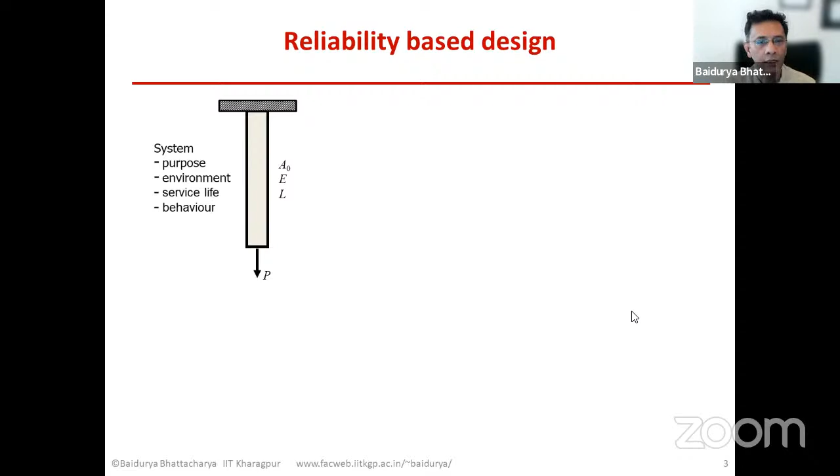So let us say that we have a structural system, a system whose mechanics we understand. And this is the simplest possible configuration that you can imagine. It's a cable suspended from the ceiling. So we know the purpose, the environment, the expected service life, and how it behaves to external inputs. And what we want to do is to assess this system. We know its system properties, the inputs, the response, the input-output model, which is very simple here as you see on the left part of your screen. On a more realistic structure, we would have a finite element model. What's important is there is a system capacity, which we know precisely, and that comes out of our understanding of the application, the purpose of what this is. So here, let us say the capacity is defined in terms of a displacement. So we should be able to define failure in terms of response exceeds capacity, which in this case is what you see on the left part of your screen: PL over AE is greater than delta max, which is the capacity of my system.

Now, there are many issues, time dependence and etc., which we don't need to touch for this particular case. The capacity can be two-sided, not one-sided. But the important point to note here is that there are uncertainties. There are uncertainties in the input to the system, uncertainties in the properties of the system. The model, the input-output model itself can be idealized, so there are uncertainties there. And other issues like missed or unknown modes of failure, etc. So what happens is failure, which is the response exceeding the capacity, or the system behaving in a manner that is not acceptable to us, because of these uncertainties, has a non-zero probability of occurrence. So that is where we come in.

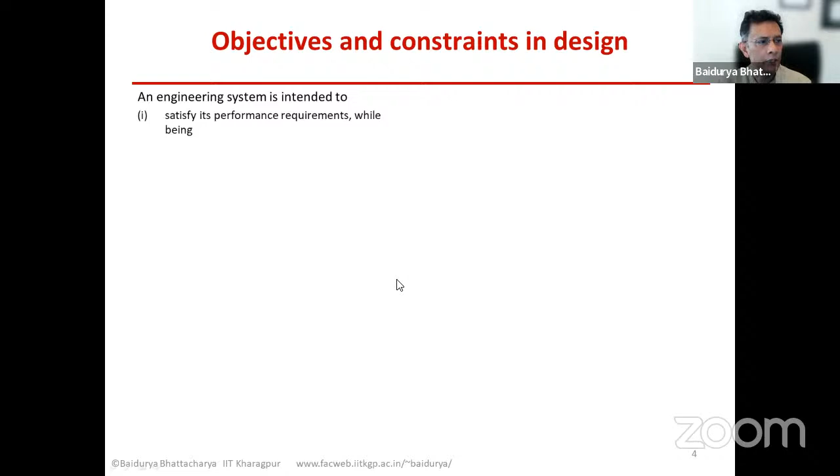An engineered system is expected to satisfy certain performance requirements while being economical and safe. So that's a very general statement. And the emphasis, whether on performance or on safety, depends on who you're talking to. So it depends on the stakeholder.

In general, it's a multi-objective optimization, so it's a very difficult problem to solve. But if we can strip it down to its absolute essential, then one approach could be to minimize the total cost, subject to performances being met - theta being the performances - and safety margins being acceptable. So M is safety margin, theta is performance, and the asterisks are the acceptable values. You can obviously have this two-sided, a lower bound and upper bound, but here we have lower bounds.

Now, this is not the only way that you could do this. You could look at the dual problem, maximize performance subject to the constraints and safety. You can bring in benefit, so benefit minus cost, the net benefit, and maximize the benefit instead. So these are all equivalent approaches to design. You could also maximize safety, but obviously safety is typically a constraint. If safety was an objective, then it would be a different system, but that we would be interested in. In general, that's also an acceptable approach.

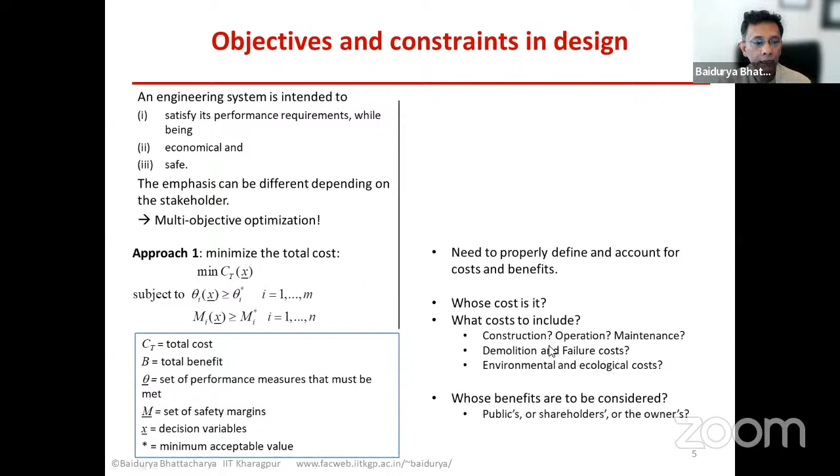Now, the question is, we need to define the costs and benefits properly - what to include, what sort of failure costs need to be taken into account. Is it the public's, is it the owner's, or is it some other stakeholder's? And finally, the question that we started with: what about the uncertainties? The moment you bring in uncertainties, then the presentation of this optimization problem has to change.

And what becomes different? First of all, the objective function, the constraints, even the decision variable. So one very common way is to minimize, instead of the total cost, the total expected cost. And likewise, you would expect that the constraints, even if they're not satisfied, should be satisfied most of the time, which is acceptable to you.

So the performance constraint should be satisfied with at least a probability Pi. The safety constraint should be satisfied at least with probability R, which is the reliability that we have been talking about. So the question is, how do we get this?

And there are issues - you could do it for systems, you could do it for components, you could do it for various types of limit states. So each of these M's, Mi greater than Mi star, comes from some performance requirements. These could be given with the help of mechanics in terms of limit state equations. So you could have life safety limit state, and on the other extreme, functionality limit states, which could be reversible and irreversible. So you could have a set of limit states for a structural system or a component.

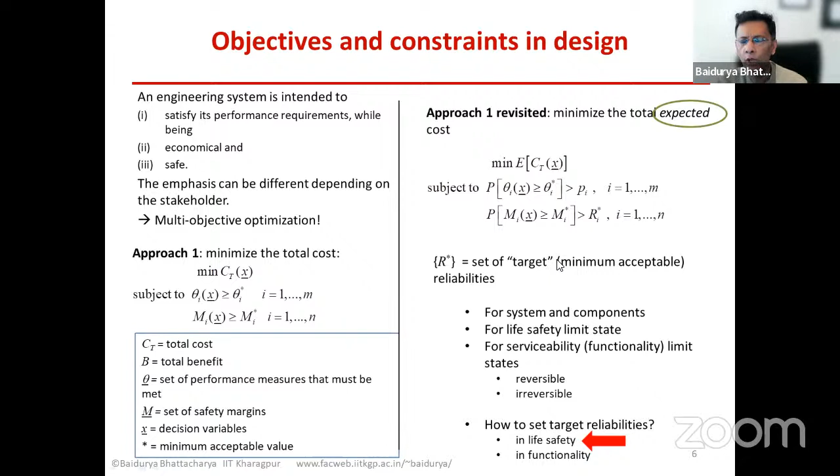So these are the questions: how safe is safe enough? At the moment you're talking about life safety, how much risk to life, property, and environment is acceptable? What failure consequences need to be taken into account, because that basically determines how safe you want it to be.

Equivalently, how much loss is acceptable, how to handle partial failures. And if not safe enough, you have to redesign, or decide how much money to spend. After setting the target reliability, although it's not part of this talk, in general it's very important to

communicate the risk properly with the owners and stakeholders, and more finer details like the differences between the actual risk and the perceived risk. The tolerable risk might change with time, and that's something you observe in different societies. It also may depend on the sense of control, whether it's voluntary or involuntary risk, and all sorts of things. But when we set target reliabilities, especially in life safety, these issues have to be kept in mind.

Now, before we discuss all the different ways and the history, let's make some very important observations. These are some facts: structural failures are rare events. Also, large-scale testing of nominally identical buildings, bridges, ships that we typically deal with, to failure, is not possible, which is different from what is done in other disciplines of reliability.

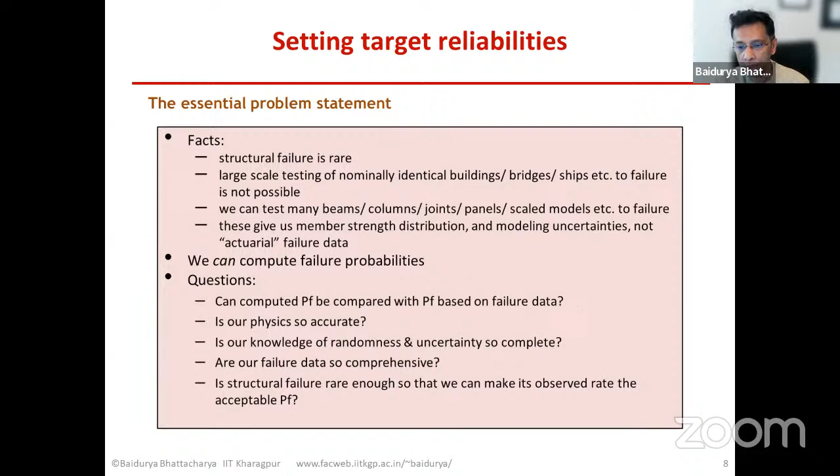So when the very first generation of codes started appearing, they tried to avoid some of these questions through a process we now call calibration. Let's go through some statements from one of the earliest researchers, the pioneer in our field, Professor A.M. Freudenthal. If we look at some of his statements from his 1956 paper, clearly the seeds were sown even that far back.

If you look at some of his statements, we need numerical values for probabilities of failure, of avoiding failure and loss of functionality, the idea of cost came in. So cost minimization, expected cost, that was also there. Now also, if life safety is involved, the author was very cautious about the acceptable failure probability, and he said that should be practically zero.

We understand that's not possible now, so we've accepted very low failure probabilities that are acceptable to all stakeholders. But the idea of life safety and good reliability for that is also very old.

Professor Freudenthal also admitted that it is not possible to do this for buildings from first principles, so until that was possible, comparison with other similar systems is what he recommended. This is actually what ends up being calibration. So we now see calibration-based methods for setting target reliabilities, and consequence-based methods, which consider fatality and economic losses. And very recently, we are seeing some movement towards optimization-based methods, and that's what I want to leave you with, some questions.

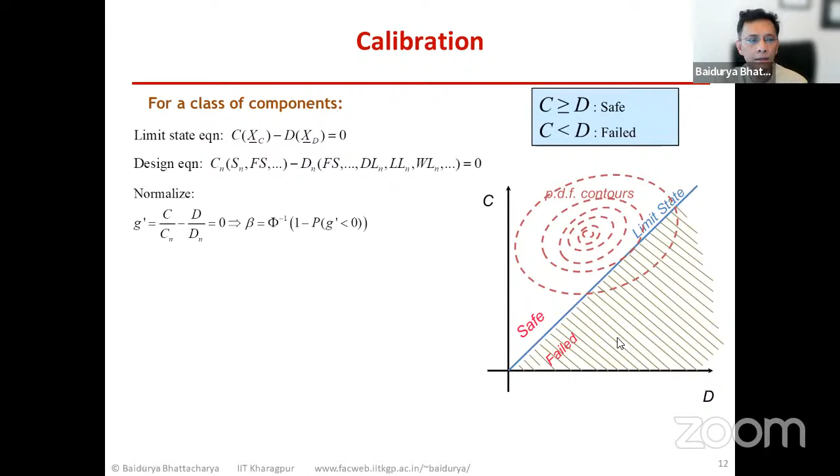So we have seen how this can be done in the earliest literature from the 70s and 80s. So here are some examples, some outputs from some of these classical papers.

So you see that this reliability index, even if there are past successful performance, is not uniform. It varies from material to material, it varies from different load combinations and load ratios. So the question then was, what do we set it to?

And if everything is brought together, this is one of the early summaries. So you see that the target reliability for gravity load, the index is 3, for gravity plus wind is 2.5, for gravity plus earthquake it's 1.75, and so on.

And you can see those in American codes, in Canadian codes, in European codes, etc. So now, if you look at bridge code, the AASHTO bridge code, you can see similar values of beta. Now, the question is, why is there so much variability?

Are they intentional, or are they just happenstances that need to be corrected? If I have collapse as the consequence of failure, then whether it's gravity or gravity plus wind or gravity plus earthquake, why would they have so much difference?

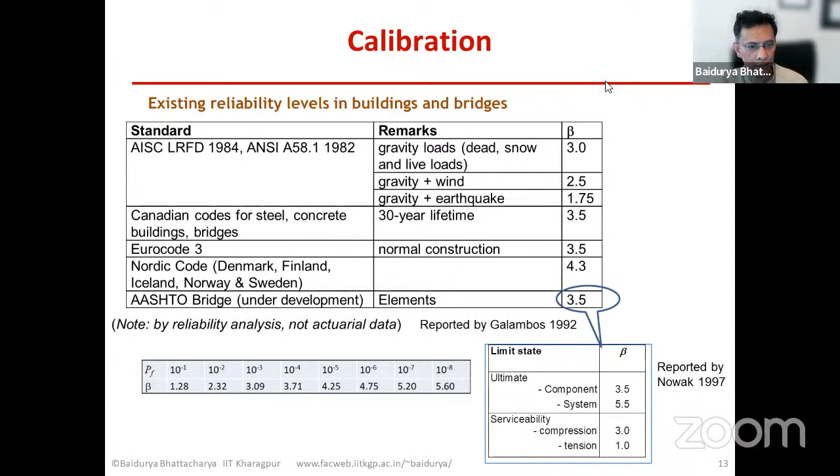Let me give you some brief summary of that. One of the earliest examples was the Canadian code S471 for offshore structures. And here we see some very far-reaching thoughts: they defined 3 safety classes, safety class 1 and 2 to do with life safety, and corresponding to those, annual target failure probabilities were set.

So safety class 1 had greater risk to life and environment, class 2 had smaller risk, and the target failure probabilities were chosen accordingly. The difference was that now what CSA said was that the load factors should be calibrated to these targets, not to existing structures, but to these new consequence-class-based target failure probabilities.

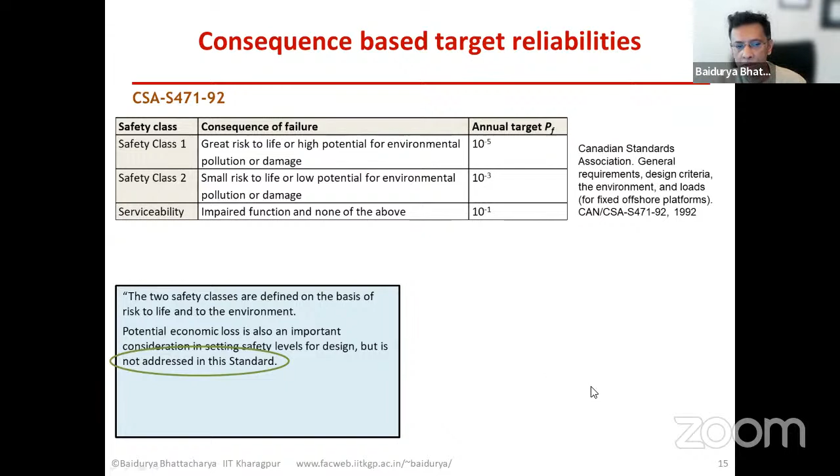What they avoided was that any optimization based on costs is something that the owner can take up if it helps him or her in cost reduction, but these target failure probabilities are absolutely sacrosanct. And being a national standard, their interest was public health and public safety, so it's very much understandable.

And safety class 1 was the default case. The owner had to actively show that safety class 2 can also be applied. So we also see, along with this consequence-based approach to design, an increased participation of the owner and the designer. The designer was no longer a passive person just doing the computations; he or she also has to take decisions based on the understanding of the system.

So now, just the same year, we see some very similar thoughts coming out of Norway across the Atlantic. What DNV did, in addition to what we have seen in that Canadian standard, is bring in another degree of freedom, which is the type of failure, the nature of warning - is the structure redundant, or is there sufficient warning available or not.

And you could compare these with the values that the Canadian standard proposed. We see that there is a 1,000-fold difference between the lowest value and the highest value in terms of the acceptable target failure probability. So starting in the early 90s, consequence became more and more center stage, away from calibration.

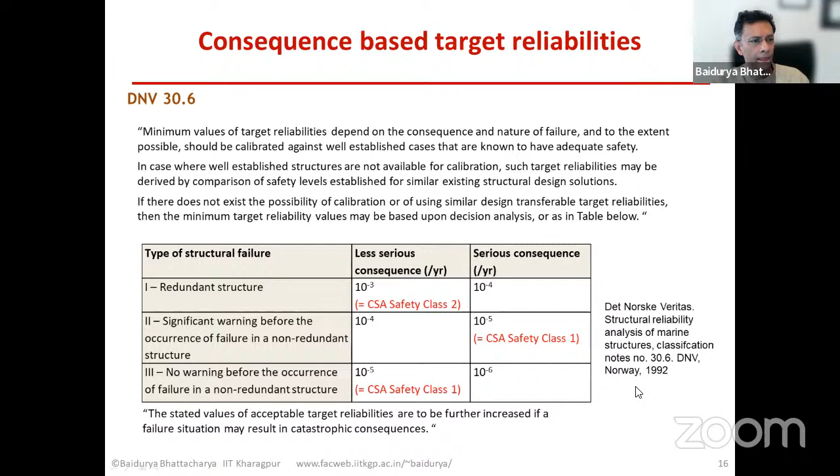We see the same thoughts in EN 1990, the Eurocodes, which came out in 2002. So we see 3 consequence classes, and again, clearly consequence given in terms of loss of human life or other consequences.

Based on that, the target reliabilities were proposed. So based on these consequence classes, there were reliability classes, and the beta values were specified. We see similar sentiments in ISO's 1998 publication on general principles on reliability.

This was changed in 2015, and that's going to be one of the last points I make. The change was made by ISO from life safety to economic optimization.

Now, ASCE 7 came out around the same time. They also had very similar thoughts. So we see worldwide, these thoughts are kind of coming together.

So there are risk categories 1, 2, 3, and 4, great risk to life versus small risk to life. So these are defined. We could take time to read through them.

But the point is that these can actually be compared to the Eurocode's consequence classes. So risk category 1 and 2 from ASCE is something like CC1 from Eurocodes. Between 3 and 4, it's CC2, and mostly 4 is CC3 from Eurocode. So there is some sort of parity.

So while this was going on, there was also a parallel thought: if life safety is really what we are concerned about, can we not bring in actual probabilities of loss of life or fatalities and tie these target reliabilities for our buildings or structures to these explicit probabilities of loss of life?

This would make things very clear. This would make the risks very clear. And also, you would not have to bring in monetary values of human life because it's always a very touchy subject. So we could bring in a risk approach, and risk, as you know, is the probability of an undesirable event times the consequence of that.

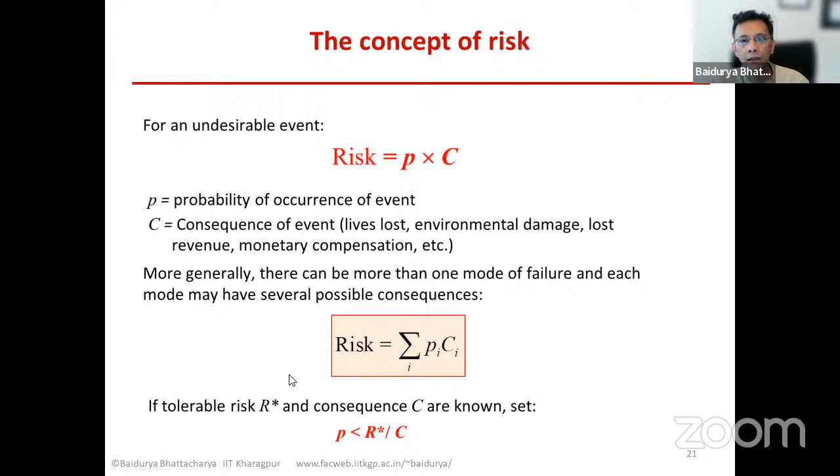So these are some of the questions that we need to ask. What risk to life is acceptable? Is one life at risk or multiple lives at risk? Was there a choice? Are we talking about construction workers whose profession is actually very risky, but can we argue that it was voluntarily chosen versus a person who is in the building without that choice?

So choice matters. Do we have to bring in value of human life? And can we avoid doing that?

Individual risks to life: there are several standards that we find over the years, over the last 40 or 50 years, that have come to be values that are clearly unacceptable, values that are kind of acceptable, and values that people are okay with, not too worried about, in terms of probability of loss of life. And these are some of the numbers.

So all causes, an individual's probability of fatality in a year is roughly 0.008. And then if you keep looking at different subgroups of this, different activities, you look at young people, you look at traffic deaths in different countries, you look at gun violence, you look at completely uncontrollable natural hazards like lightning strikes, and construction workers or other hazardous activities in industry. So these vary over 4 orders of magnitude.

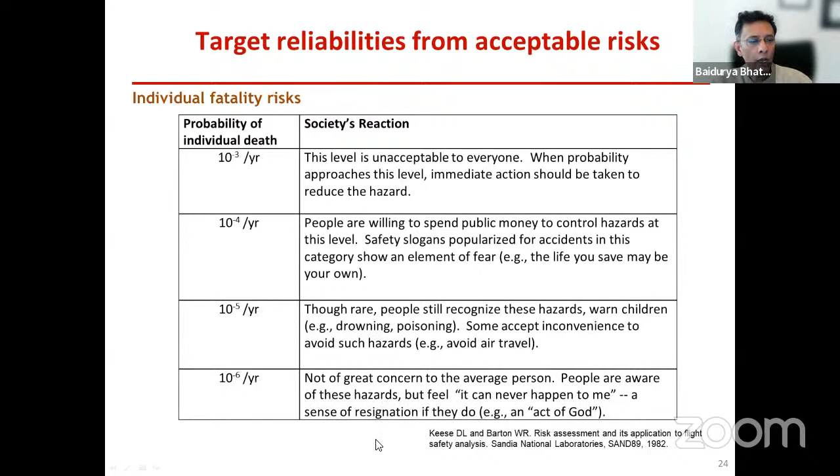So what the community did was come up with different standards; we see in different countries around the world the acceptable limits of risk to the public coming close to 10 to the minus 5 to 10 to the minus 6 per year. So these are some of the very common standards from all over the world that we see.

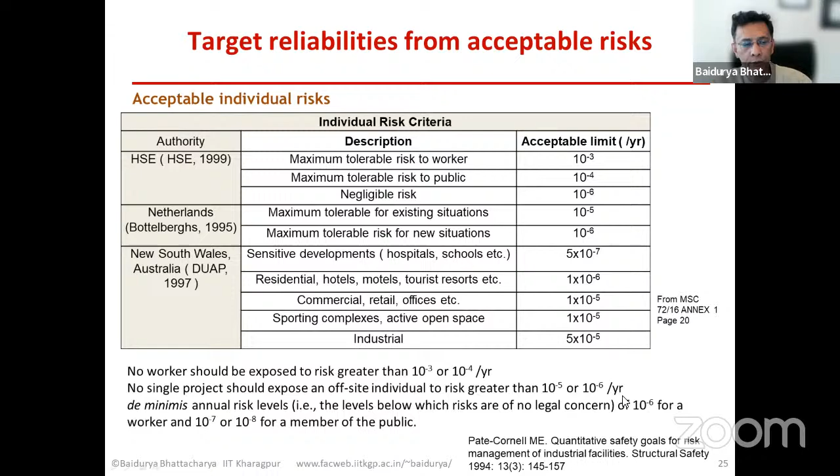So if we take this about 10 to the minus 5 or 10 to the minus 6 per year as a target, then where do buildings stand? So in general, we see that building failure is of the order of this.

What happens now is if multiple failures are involved, if multiple fatalities are involved - all the numbers that we saw so far are in terms of one individual life. This also has been discussed and researched for almost 50 years now.

One of the earliest examples came from the construction industry in the UK. Their approach was that it's inversely proportional to the number of lives at risk. So more number of lives, the higher should be the target reliability, the less should be the acceptable probability of failure. It also depends on factors like choice, available warning, and so on.

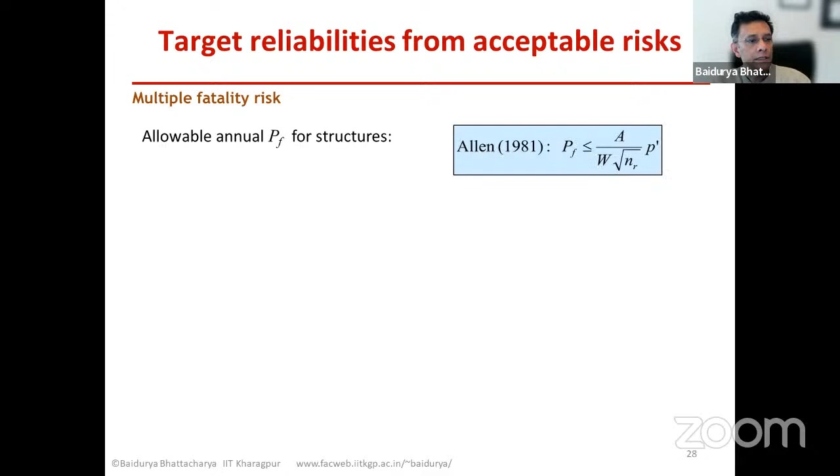We see some of these values for KS, which brings in those factors of choice. We see something similar from Professor Dave Allen's work from Canada. He also included a warning factor, which we've seen before. His approach used the square root of n in the denominator, so it became less sensitive to the number of lives lost in his model.

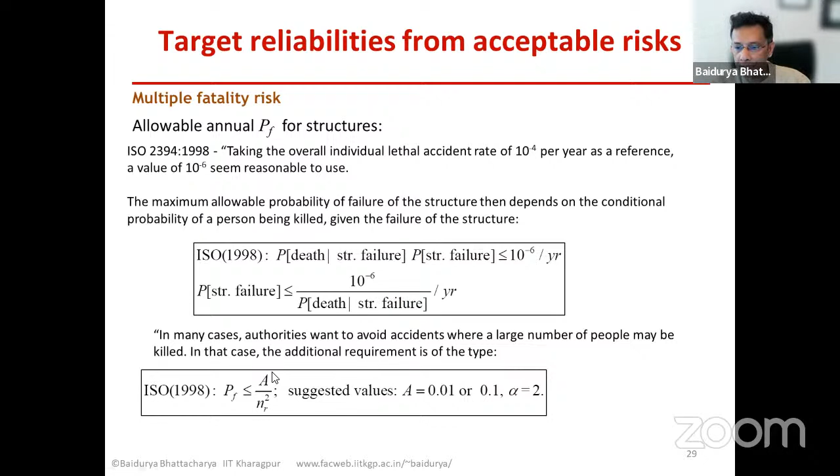We have seen something similar in the 1998 revision of ISO 2394 - it's the square of n in the denominator, so more lost lives in one event has to be avoided in that proportion. So there is still a move in terms of bringing in these fatality considerations and setting target reliabilities explicitly based on that.

So this is kind of putting everything together - we have the ability. But what we see is that another movement started about 20 years back with the publication of the Probabilistic Model Code by JCSS, the Joint Committee on Structural Safety out of Europe, which has later been adopted by ISO 2394 in 2015. This took the very bold step of putting in, in an indirect manner, a monetary value of human life. So I call that postmodern - let's see what the consequences of that have been.

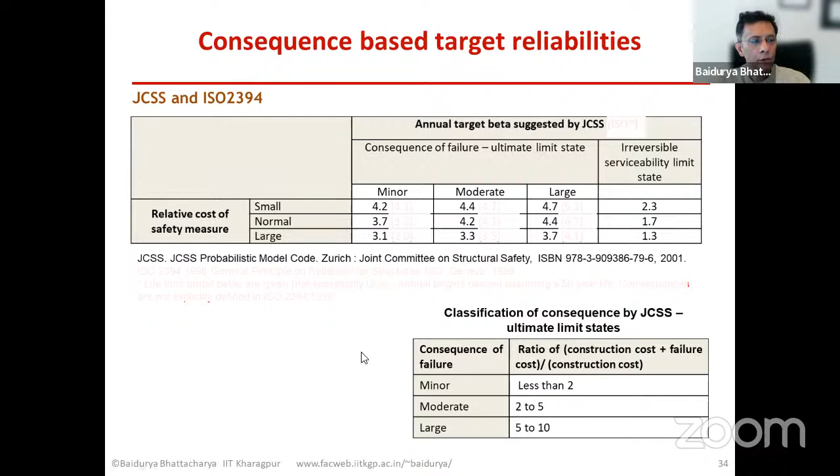The numbers are more or less the same. If you compare the red with the black, you get roughly the same values. The red ones are the previous standards from ISO 1998, which came not from monetary considerations, but from risk and consequence considerations. But even in the context of Europe, these numbers are more or less the same.

The important thing to note is that the consequence that JCSS took to is not in terms of lives, but costs, the relative cost, the ratio of construction cost plus failure cost over construction cost. So the number of lives lost, or what the value of life is, was completely avoided, and everything became very monetary oriented. This approach was taken up by the next revision of ISO when they brought out the 2394 standard in 2015.

And the basis of that was this life quality index. As I said, saving life costs money. So how much money are you willing to spend to save a life? That would sound reasonable, but if the approach is not done properly, then we come with some very absurd numbers, which is what I will end my talk with.

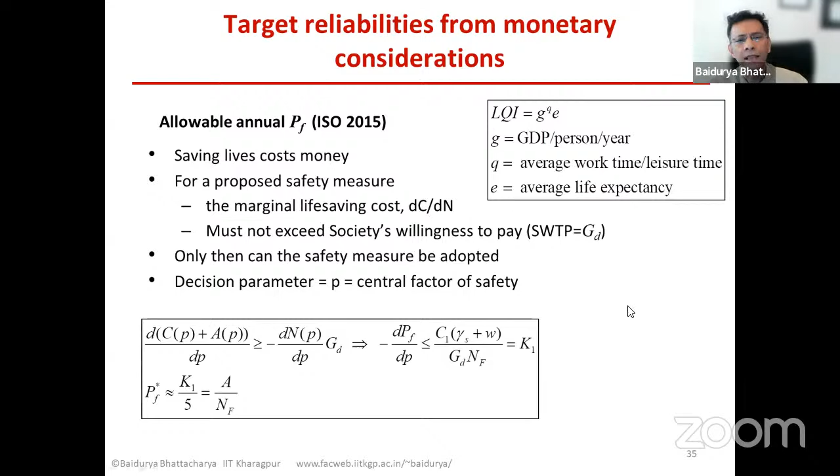So now, what is the approach? As I said, the incremental cost of that investment has to be at most what society is willing to pay. So GD is society's willingness to pay times the expected number of lives that you can save by that measure. And there are various assumptions and computations that go on in the background.

With all these quantities that you should consider according to ISO 2394 2015: the construction cost, the obsolescence cost, the central safety factor, which is the decision variable that they have chosen, the number of fatalities, the willingness to pay that I mentioned, the investment cost, the discount rate, and so on.

These numbers don't really change because you can imagine that even if you change something, you need to make sure that it's acceptable to your target audience. But if you apply these to a building in India, you get something very absurd.

And so if you bring in this SWTP, Society's Willingness to Pay to Save a Life, and according to their computations, according to ISO computations, what India is willing to spend in terms of saving an Indian life, you come up with numbers - going through the same set of computations using our Delhi Schedule of Rates from CPWD for how much it costs to build a building - you come up with numbers that are absurdly low.

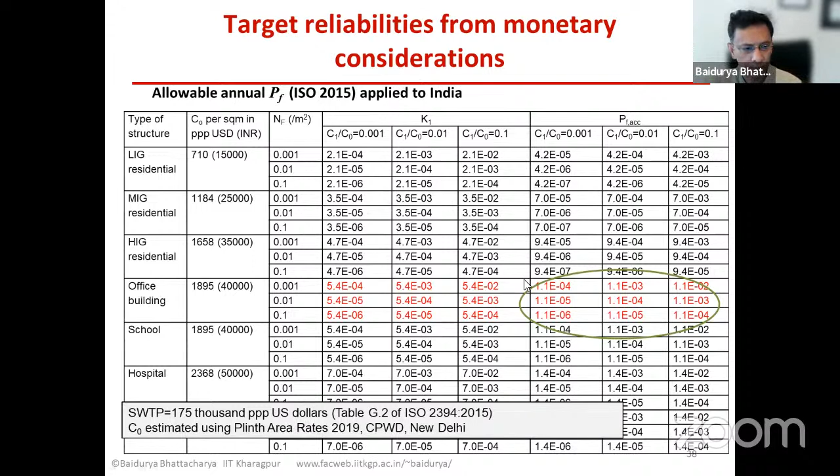Thank you, Professor Baidurya. I think if any questions are there from the participants, they can ask now.

This is Manohar, can I ask a question? Yes, hi, how are you? Hi, yeah, a lot of food for thought. Very nice presentation. I just want a couple of general comments.

What is your take on performance-based structural engineering, where many of the decisions on quantifying uncertainties and safety requirements is left to the client or to the designer? So where does prescriptive codes and performance-based structural engineering stand vis-a-vis the kind of issues that you are mentioning?

I think it's in the right direction, because a design code cannot think of all possibilities. By definition, a design code is the minimum standard. It does not have to be the only thing that you satisfy.

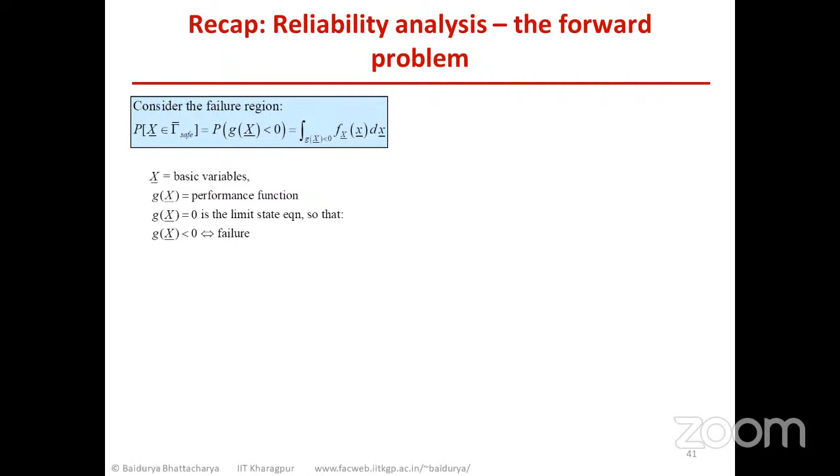Any other questions? Hello? If there are no other questions, I hope there are no other questions.

If there are no other questions, on behalf of the organizers, I would like to thank Professor Baidurya Bhattacharya for giving us such an excellent presentation about a very difficult topic. I can tell you, this is a very difficult topic because we are looking at acceptability of the society to adopt the standards that have been mentioned.

And now, as he said, the future codes of practice are going to be - Professor Baidurya may also react on this - I think in future they are going to be resilience-based. One is life safety, the other is resilience; they are evolving codes to be resilience based. I think resilience is much more complex, and many other extraneous factors need to be considered to come out with codes with respect to resilience.

So with this, I would like to thank Professor Baidurya Bhattacharya for giving such a presentation, and also all the discussers who came out with such excellent questions. Thank you very much, Professor Baidurya Bhattacharya.

Thank you very much. I really enjoyed this, and it was a very educational experience for me also. Thank you. Thank you, sir. Madam, yes. Up to you, madam. Yes.

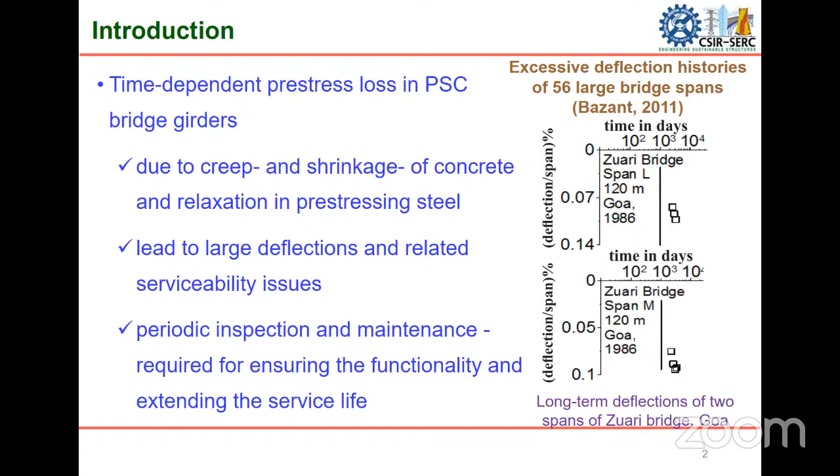As we know, we have a lot of pre-stressed concrete bridge systems consisting of a number of girders, and time-dependent pre-stress loss in these girders due to creep, shrinkage and relaxation is a major problem observed for the last 50-60 years, leading to large deflections and related serviceability issues, and even collapse and safety concerns. So there's a need for periodic inspection and maintenance of these structures to ensure functionality and extend their service life.

For instance, the MRTS system in Chennai has a large number of girders, about 270 girders of span 22.5 meters and 288 girders of 18 meter span, PSC girders, almost all exposed to a similar exposure condition, that is coastal environment in this case. So inspecting and maintaining such a massive system, with all girders going for inspection, is not possible because of limited funds available.

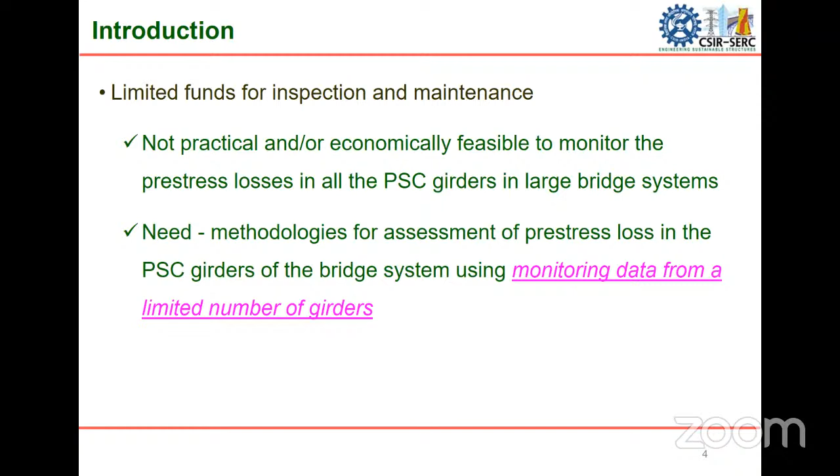So there's a need for methodologies which can help us assess the condition of this system as a whole, based on monitoring or inspection of a limited number of girders.

There are already some methodologies proposed, like Markov chain model methods. One drawback is that we need inspection data on adjacent girders if we are using Markov chain models, which may not always be feasible.

There have been other approaches, like a Polya urn based model, which is useful when we have inspection data from randomly selected PSC girders. It need not be adjacent. That condition required for Markov chain models can be relaxed when using a Polya urn model.

This procedure integrates a Polya urn model, which is a stochastic birth process model, with the pre-stress loss estimation method of AASHTO, and the assessment at different times in a selected number of girders. So the requirement of adjacency is relaxed here.

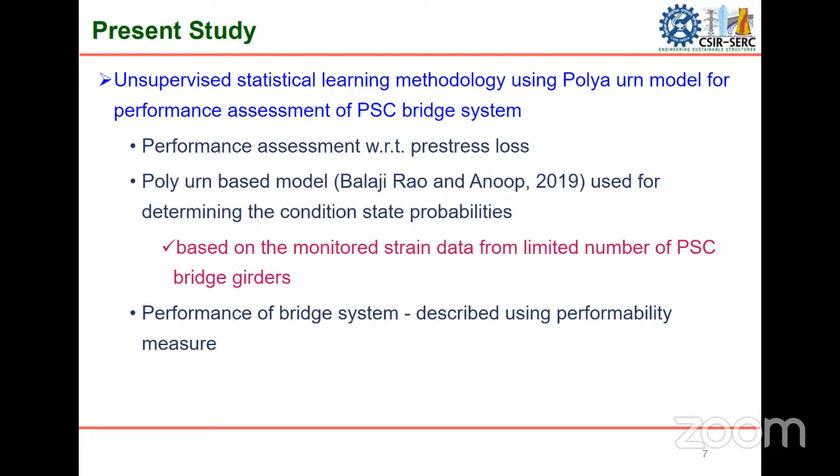In the present study, this methodology is combined with a performance-based approach using performability for determining the performance assessment of a bridge system. So the proposed methodology starts with determination of allowable pre-stress loss at different times - what is the allowable value of pre-stress loss you can permit in your girders.

That is determined based on the AASHTO LRFD code, detailed estimate using AASHTO LRFD. This pre-stress loss is considered the allowable pre-stress loss because these are the values considered in the design. Then comes estimation of actual pre-stress loss using strain monitoring data on a selected number of girders.

Then estimation of condition state probabilities. Here we use the Polya urn model to estimate the condition state probabilities of the bridge system based on information on a limited number of girders. How to make an inference on the condition state of the entire bridge system is developed using the basic Polya urn model methodology.

And once you get the condition state probabilities, we compute the performability of the system. Now, what is a Polya urn model?

It's a type of pure birth process, as mentioned, and it represents a system containing objects of two types. The basic Polya urn model consists of a system having two types - you can consider an urn or a box which has two types of balls. These objects are called balls, normally named based on their color, say white ball and black ball.

In the present study, we are assuming that the balls are the PSC girders - the PSC girders we are monitoring are the balls initially in the system. The color of the ball indicates the state of pre-stress loss, so the ball color indicates the type of pre-stress loss.

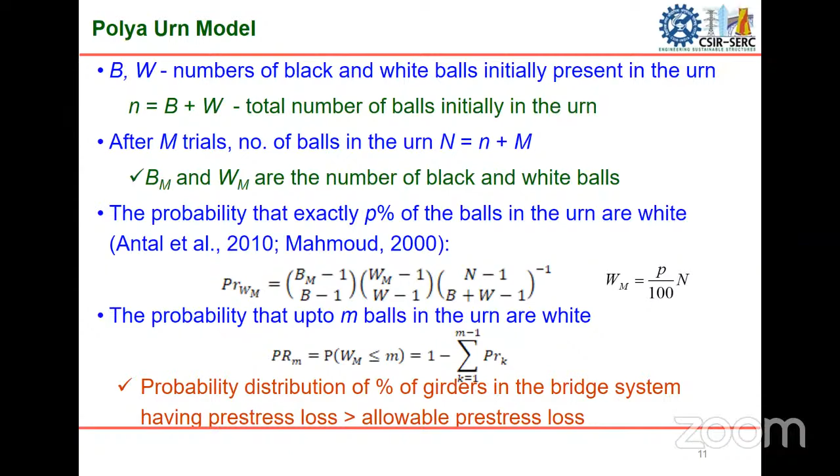So, how do we get the probability distribution of percentage of girders in the bridge system having prestress loss more than the allowed value? Once we get this probability distribution, we can also determine the condition state probabilities for the bridge system. We have defined 5 condition states.

The first is 'very good', meaning 0 to 20% of the girders in the entire bridge system have prestress loss more than the allowable value. Then satisfactory state, poor state, serious state, and critical state, where almost 80 to 100% of the girders have prestress loss more than the allowable.

So once we get the probability distribution using the Polya model, we can also determine the condition state probabilities. Now, once we get the condition state probability, we determine the performance of the system using a performability model.

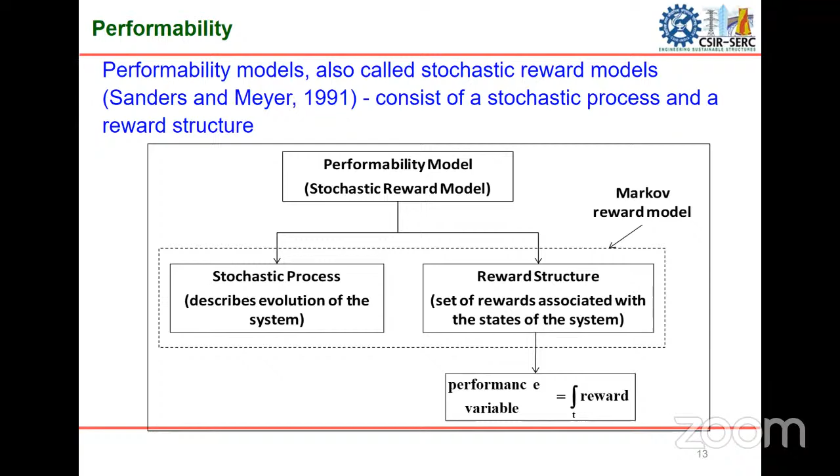This is nothing but a stochastic reward model, where we have a stochastic process describing the evolution of the system, and a reward structure, which is a set of rewards associated with the states of the system. When the system is in a given condition state, we provide a reward to the system. This is the performability model.

Suppose CS is the condition state, and the probability of being in that condition state is given by P. Then R is the reward for that condition state. The expected instantaneous reward at any time is given by the summation of Ri into Pi at that time.

So in the present study, the reward rate considered is as follows: very good means 10, because normally in bridge systems, whatever inspection or condition assessment we perform, we rate it on a scale of 0 to 9 or 0 to 10. That is the scale we used, so we used a reward rate scale from 10 to 0 here.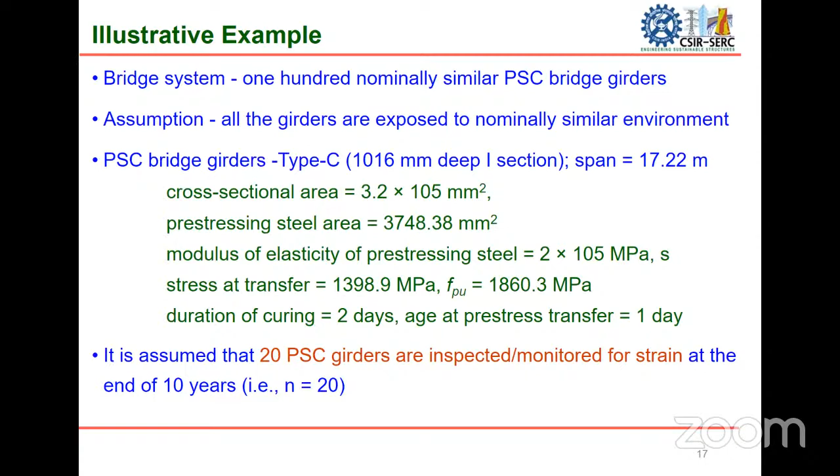It is assumed that we are monitoring or inspecting 20 girders out of these 100. All 20 girders are inspected or monitored at the end of 10 years. So the initial configuration of the urn is only 20 balls.

Based on those probabilities, we can also determine the variation in condition state probabilities for different initial configurations. This shows the condition state probabilities for different initial state configurations. Each value of W represents a typical initial configuration.

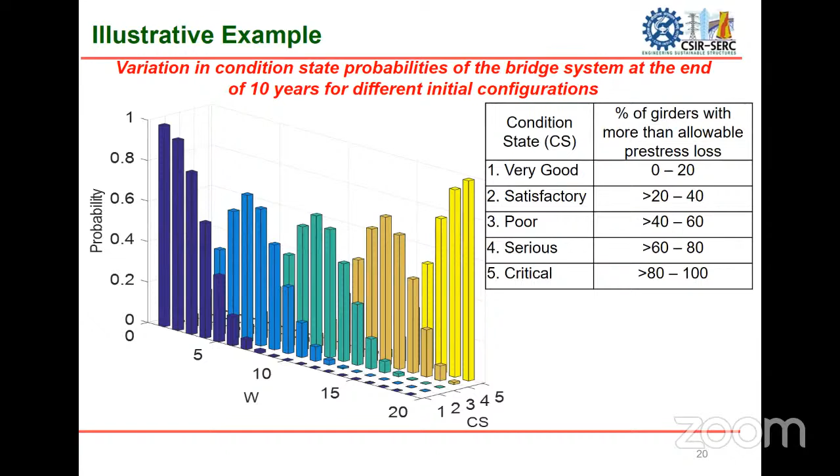W0 means no girder is having prestress loss more than the allowable prestress loss. Coming to W20, all the girders have prestress loss more than the allowable prestress loss. So each W value represents a typical initial configuration and gives the condition state probabilities at the end of 10 years.

This will be useful in determining the performance of the system using limited monitoring data. To summarize, we have proposed a Polya urn-based methodology for performance-based assessment. This is a data-driven approach with statistical learning, which can be used for structural monitoring.

It uses data from Monte Carlo simulation trained on a very limited number of girders, and is useful when the monitoring data is from randomly selected girders. It need not be that the girders are adjacent to each other. The assumption is that all the girders are nominally similar and exposed to nominally similar environments.

The number of girders in the system is much more than the number of monitored girders for application of the Polya urn model. And the reward rates we considered right now are assumed to be time invariant.

But in practical cases, we can consider time varying reward rates, because at higher periods of time, say at the age of 50 or 100 years, we can reduce the rewards associated with the system. Also, we can link the computed performability with expert decision making.

When we give the performability measure for an expert to make a decision, there will be some uncertainty associated with the human mental process in making that judgment. Theories such as Brunswikian theory can be used for linking the performability measure with expert decision making.

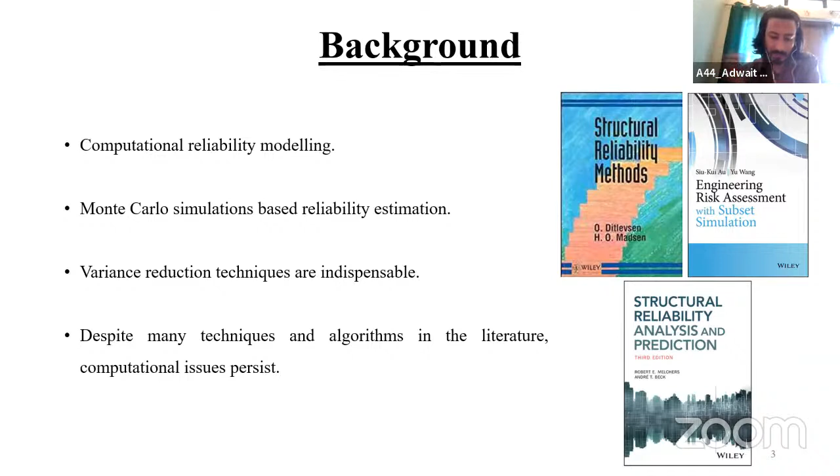This slide shows a visual guide of how the subset simulation method works. We have initial samples, we construct the first subset, we use MCMC methods to generate more samples, then generate the second subset, and so on until we get to the actual failure region.

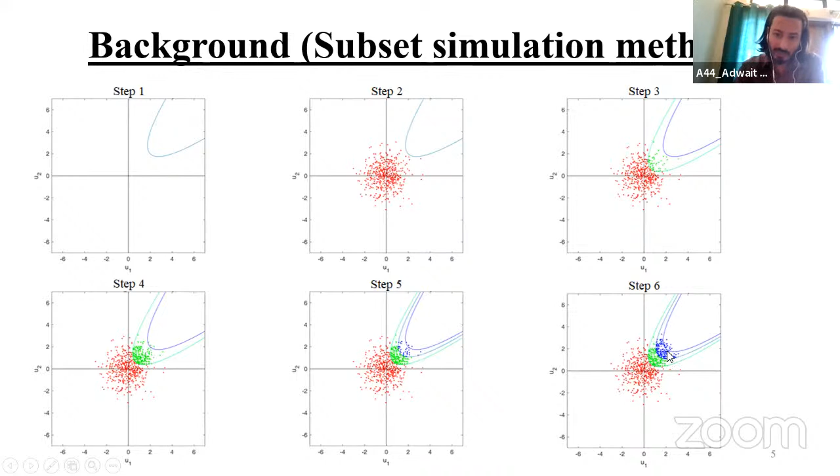Now we get to the heart of our research topic: challenges in reliability estimation. It can be shown that when there are geometric features in a reliability problem, such as existence of multiple failure regions contributing significantly to the failure probability, presence of disconnected failure regions, or sharp changes in performance function values especially near the failure region, these features manifest as challenges in all algorithms of reliability estimation—be it first order or second order reliability method, importance sampling based methods, or even subset simulation method. These problems are worsened when performance functions are implicitly defined through computational codes, where we don't even know if these kinds of complications have arisen in the relevant space.

So our research is on how these difficulties can be dealt with, particularly in subset simulation type methods. Additionally, when do these kinds of problems arise in the context of structural engineering? In other words, what kind of physics brings about these difficulties and complications in structural engineering, which is a question that has not really been addressed in the current literature either.

Specific to subset simulation type methods, these geometric difficulties manifest themselves as difficulties in MCMC sampling. That is to say, when these complications are present in the limit surfaces, the MCMC sampling becomes challenging in some sense. Now, in what sense? Let's take a look.

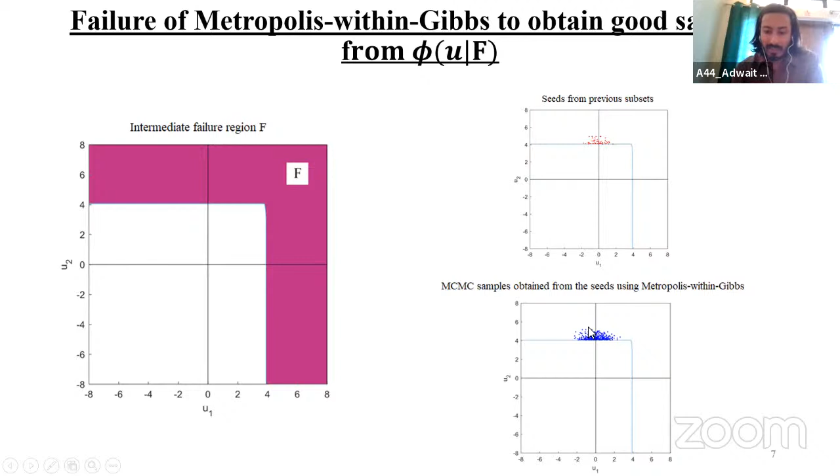Our problem statement then is to develop an MCMC method which, in presence of these difficulties, enables the generated MCMC samples to detect important failure regions, which would otherwise not have been detected by traditional MCMC techniques.

In order to solve this, our idea has been to use what's called the replica exchange MCMC algorithm, which was initially developed in 1986 in the physics literature in the study of what are called spin glass models for very low temperatures. It was developed as an MCMC tool later in 1991 in the statistics community.

Here the idea is we want to simulate from this PDF. So we introduce an additional PDF, which we're calling the Explorer PDF, and we generate samples from this PDF as well. The idea then is to exchange samples.

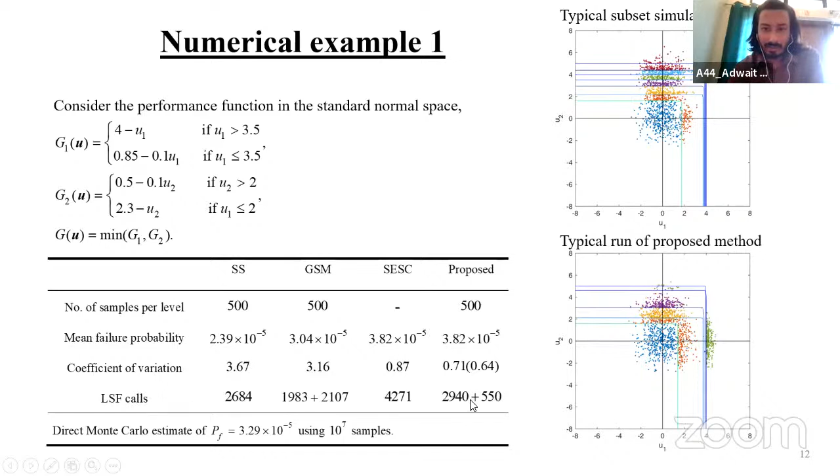Here as well, for a typical subset simulation run, we see that these samples fail to detect an important failure region here, and it only ends up sampling from this region. But the proposed algorithm, again because of the embedded MCMC algorithm, ends up detecting both of these important failure regions. This is reflected in the low value of the coefficient of variation compared to the other existing methods.

The third numerical example is that of a structure prone to snap-through buckling. Once again, the details are given here, and the performance function is defined here.

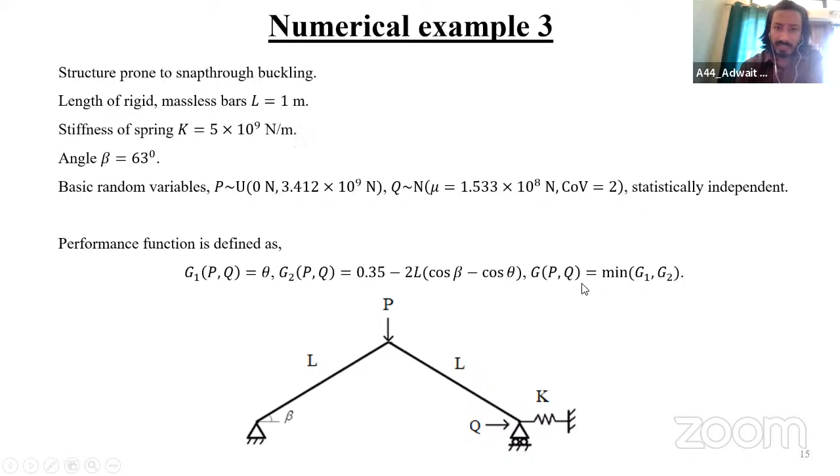Once again, a typical run of a subset simulation fails in identifying this important failure region because of the inability of the MCMC samples to sample well from the required conditional PDFs. Whereas for the proposed method, this ends up detecting this important failure region. And here we see that the subset simulation run very highly underestimates the failure probability, by an order of magnitude of over 5.

So the coefficient of variation is also very high. Whereas, looking at the direct Monte Carlo estimate, we see that the result we obtain is fairly accurate with an acceptable coefficient of variation.

Finally, here we consider the problem of reliability computation when the performance function is defined implicitly through a finite element code, which is run on a commercial software, Abaqus. The reliability estimation code is interfaced with the finite element program for reliability computation.

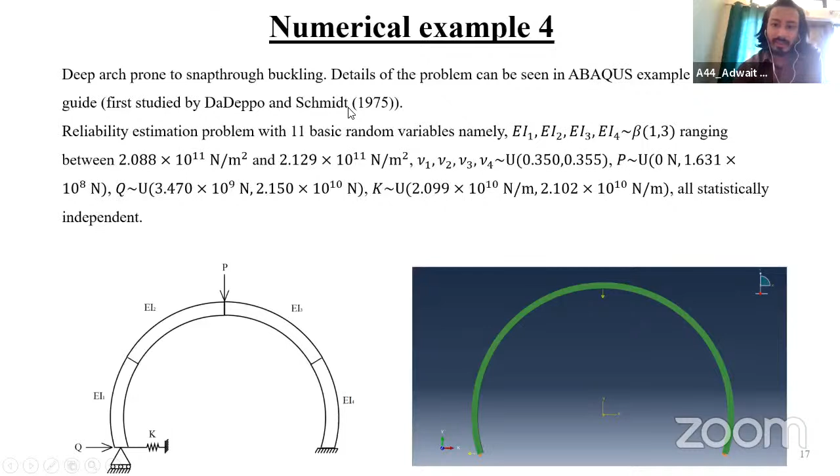We've considered a deep arch here prone to snap-through buckling. It's a problem that has been borrowed from Abaqus' handbook of example problems, and this arch was first studied by DaDeppo and Schmidt in 1975. The details are given here.

The point here is that among all the existing methods, the first two methods failed in detecting the important failure region, which is why they heavily underestimate the failure probability, whereas this method here overestimates the failure probability. The result that we have obtained here is fairly well validated by the direct Monte Carlo curve that is given here.

In conclusion, we've developed an MCMC algorithm based on a replica exchange strategy to improve quality of MCMC samples. We've shown that these kinds of difficult geometry that I've just described can arise in structures that undergo either vibration or failures triggered by snap-through buckling.

We've demonstrated the effectiveness of the proposed MCMC method in various structural engineering examples. A possible future direction is to develop a strategy to deal with these difficult performance functions even in higher dimensions. That's the end of my talk, and I'm happy to answer any questions. Thank you.

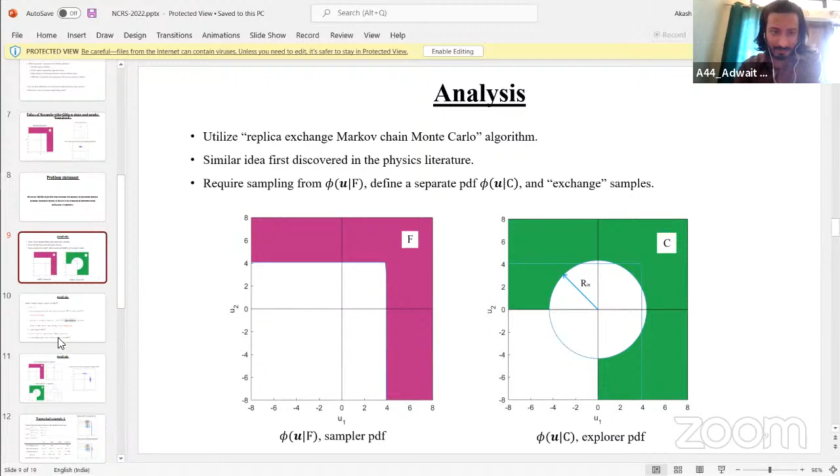I didn't say it because of the time constraint, but the idea is quite simple. We scale down this limit state function so that the average distance of these seeds from the origin becomes equal to 1.

So that the failure region actually becomes much larger than it is, and the brute force Monte Carlo samples then actually lie there. Somehow you are doing some scaling here. Yeah, scaling and then the Monte Carlo samples. Okay, got it.

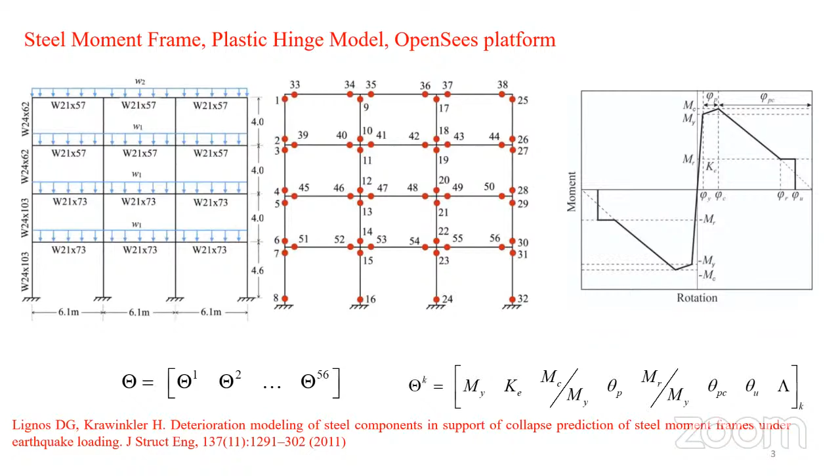Now coming to the next slide. We should mention the scope of this study. As already said, we are not considering the uncertainty in input excitation in this present problem. So we selected the input excitation from a set of 44 recorded ground motions, based on incremental dynamic analysis.

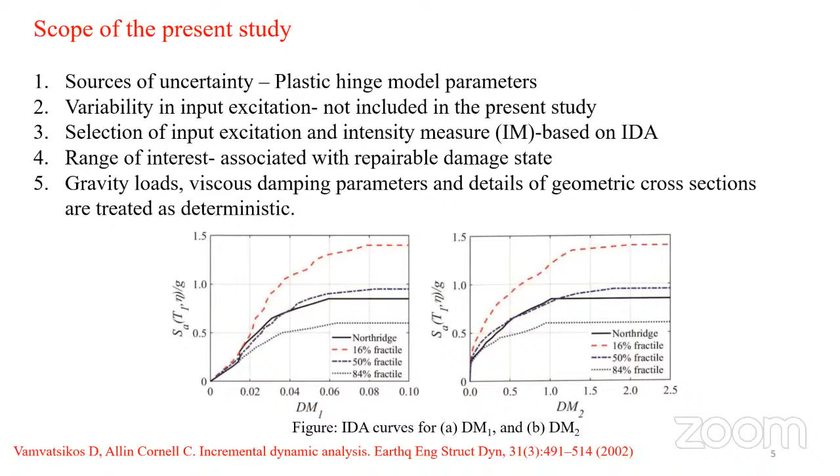The bottom figures are basically incremental dynamic analysis curves, or IDA curves, for the two damage measures. If you see the figure on the right hand side, this black solid line represents the Northridge excitation, and its IDA curve closely follows the median IDA curve. So for our study, we selected Northridge excitation, and we set the intensity measure at 0.5g so that the induced damage in the structure remains within the repairable damage state, meaning the Park-Ang damage index will vary from 0.2 to 0.4.

Now coming to the next slide. So far we have performed probabilistic seismic damage analysis. The next level of analysis is global response sensitivity analysis. Why is global response sensitivity analysis important for a structural engineer? Structural engineers are often interested in knowing, out of a large set of uncertain model parameters, which parameters or group of parameters are most influential in producing variability in response within a predefined range.

There are a number of methods available for this analysis, based on simplicity and computational efficiency. We have adopted the factor mapping method, and further we have generalized that method. In the next slide, I will briefly explain the naive version of this factor mapping method, then propose our generalization.

In the factor mapping method, theta is the input random variables, f is the performance function, and d is the response. The response quantity's realization is classified into two categories: realizations that fall within the range of interest, that is set A, and realizations that don't fall in the range of interest. In our problem, the range of interest is 0.2 to 0.4, which represents the repairable damage state for the Park-Ang damage index.

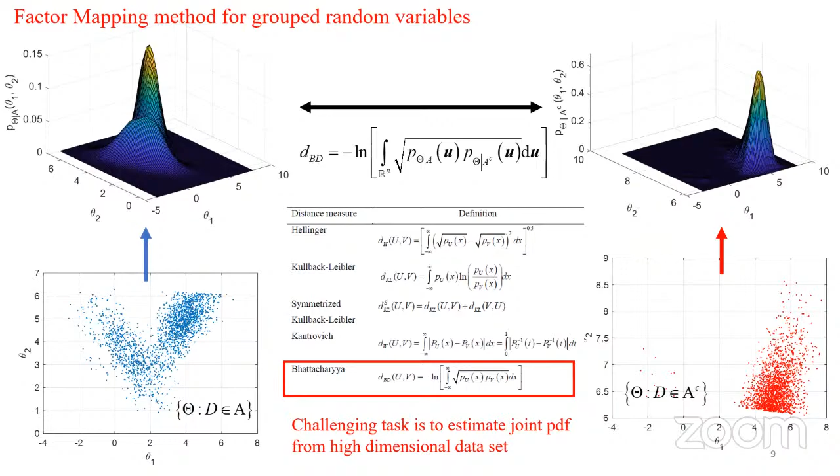Now there are a number of probabilistic distance measures available, among which we have chosen the Bhattacharyya distance for this analysis. Now coming to the next slide.

Whatever I said in my last presentation, here I have written it mathematically. Basically, the Bhattacharyya distance calculation involves the estimation of the probability density function from its realizations. It becomes very difficult when the group size becomes large, that is, when the problem becomes high dimensional. So we have explored three alternative methods to intelligently tackle this issue.

We have explored three methods: Nataf's transformation-based method, Copula transformation-based method, and independent component analysis-based approach. Now coming to the next slide.

Here are the associated mathematics, but I will highlight the key features of these formulations for these three models. Consider an n-dimensional random vector U for which realizations are available. The objective is to estimate the joint probability density function from its realizations. In Nataf and Copula methods, the joint probability density function can be expressed as a product of the first order density functions of its components. The dependence of the components is taken care of. For the case of Nataf, an n-dimensional Gaussian function takes care of the dependence among its components.

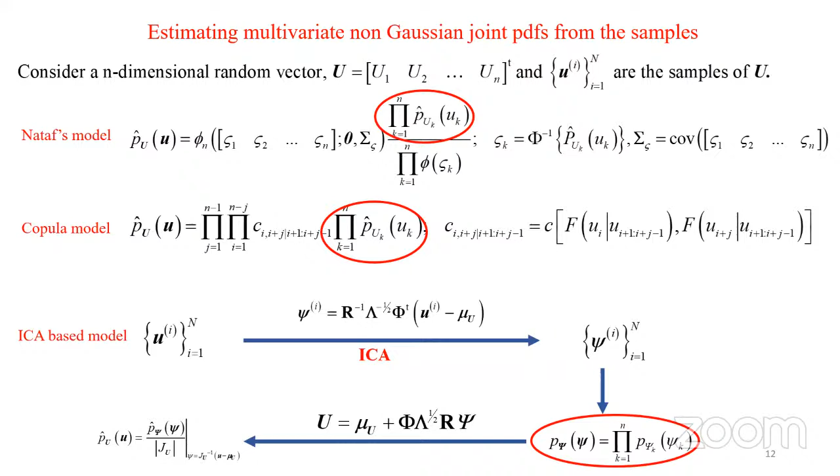So these are the three methods that we have used. Once I can estimate the joint density function, calculating the Bhattacharyya distance is just a simple step. Now I will apply those three methods to the frame problem shown in an earlier slide.

The second one traces the post-yield branch. The third one traces the softening and the residual plateau. And the fourth parameter group, containing a single parameter lambda, basically controls the cyclic degradation.

Now, here I have employed all three methods that we have discussed: Nataf-based method, copula-based method, and ICA-based method on this 224 random variable problem. And particularly for the copula-based approach, we have considered two copulas: one is Gaussian copula, another one is T copula.

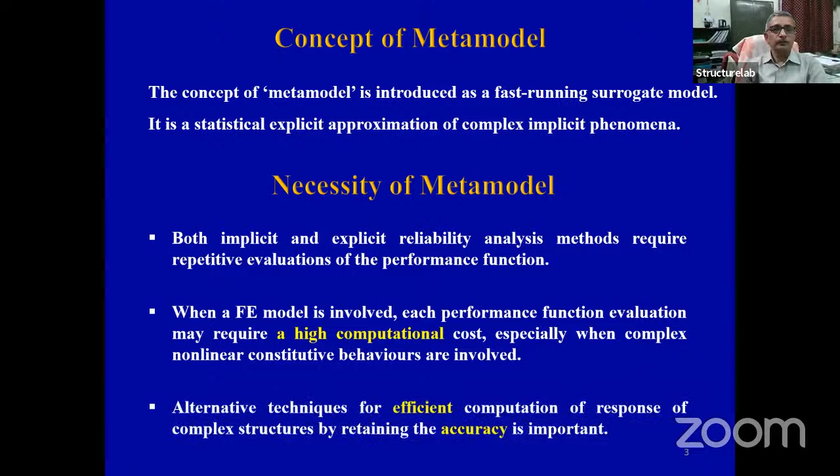Think about a typical civil engineering structure - you have a 10-story building, and one run of that building takes about 10-15 minutes. Now if you have to repeat it for even 10,000 times, you can understand the involvement. So that restricts real-life reliability analysis problems with the direct approach of Monte Carlo simulation, or even the second moment-based approach. Here is the need for an efficient computational scheme with limited computational cost, and that is the relevancy of meta modeling technique in structural reliability analysis.

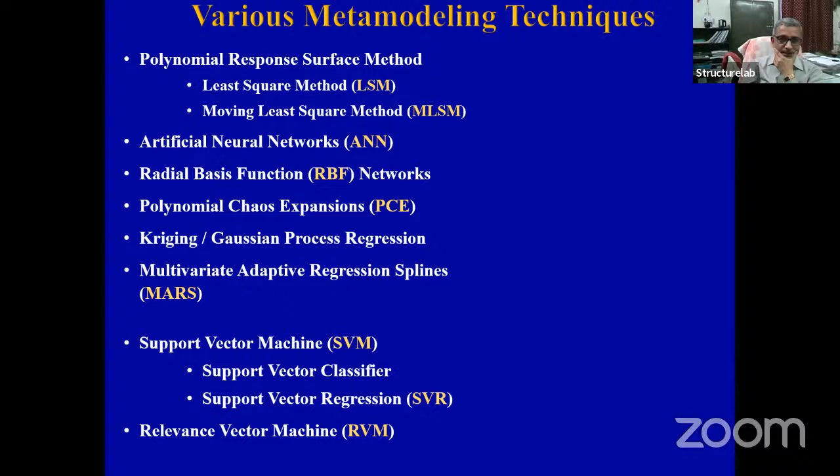If you look at the various meta modeling techniques - I may have missed many more, but I've given some of the important ones - if you look at this first group, these are basically empirical risk minimization principle based meta modeling techniques. The oldest one is the response surface method. Then you have ANN, radial basis function, PC, Kriging - most important one, Kriging, very popular nowadays - Mars, and many more such types. But all these classes are under the empirical risk minimization technique. These meta modeling approaches are powerful and have been extensively used in the field of structural reliability within the framework of Monte Carlo simulation approach. But there is a key issue with this empirical risk minimization based meta modeling technique.

Their accuracy largely depends on the number of training data. The more data you take, the better your approximation is.

But taking more data is not always the solution, as it sometimes leads to overfitting. So these are two conflicting issues: if you take more data, you will get a better solution, but you may also invite an overfitting problem. This is the difficulty with the traditional empirical risk minimization based technique.

There is another class of technique, mainly support vector machine based methods: support vector classifier, support vector regression, and the subsequent development in the Bayesian framework of support vector machine, that is the relevance vector machine. These approaches are based on structural risk minimization, which we will come to a little bit later in my slides.

Thus, there is an attempt to improve the performance of the metamodel near the failure boundary. We are really interested in the values of the performance function which are in and around 0, either on the positive or negative side, say within plus or minus 0.5 or 0.25. Those outcomes are most important to us, meaning the structural reliability community is interested in approximation of the function near the failure boundary.

So including more data points near the limit state to construct the design of experiment is naturally our interest, because the approximation around the limit state function is important. You use more data points near the failure boundary, and far away from the boundary you can take fewer data points, because mistakes in approximating the function there will not really affect your reliability. This is the basic concept of using adaptive design of experiment, ensuring more data points around the failure boundary while satisfying some basic principle of model fitting.

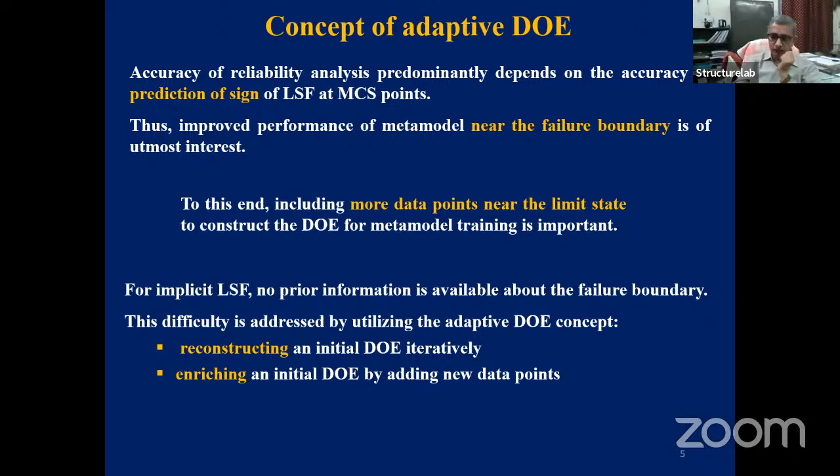So that is the idea of adaptive meta modeling. The applications of this concept are enormous, and these are even applied to support vector regression based meta models. Particularly, apart from support vector regression, in the Kriging approach there are a number of literature: adaptive Kriging and MCS, AKMCS, and its various variants are available. You can see a large number of literature on the concept of adaptive Kriging.

Comparatively, in support vector regression, we could identify only 3 studies, but I must say that the adaptive concepts used in other meta modeling applications can also be suitably used in support vector regression approach. But our observation is that the sample size requirement is still an issue to achieve reasonable accuracy.

Sometimes you may need almost 1,000 samples to get an acceptable accuracy in your estimated reliability, particularly when the reliability is in the range of 10 to the minus 4, minus 5 or minus 6. In that range, sometimes you may need about 1,000 samples. And many of the adaptive sampling approaches fail to estimate the reliability when the probability of failure is much less.

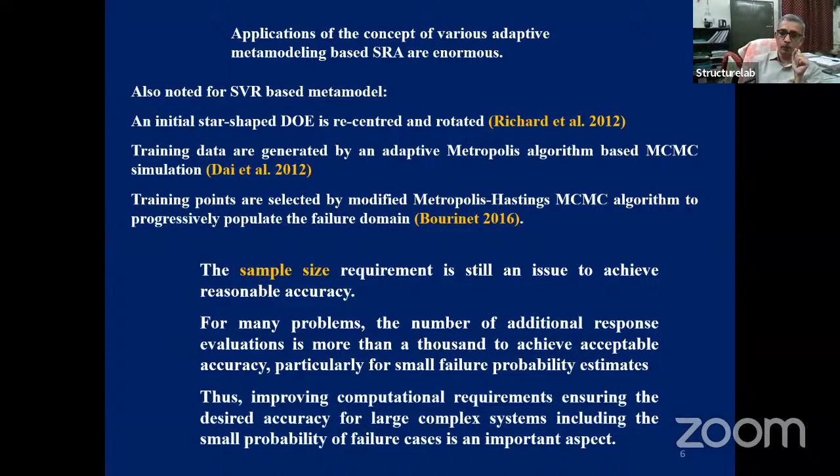So improving computational requirement and ensuring the desired accuracy for large complex systems seems to be an important aspect that we have tried to address in our work.

Specifically, we have proposed a 2-stage adaptive scheme to effectively obtain necessary training data to construct SVR-based meta models for Monte Carlo simulation-based structural reliability analysis. As I already pointed out, the algorithm is hinged on the prediction accuracy of a meta model near the failure surface region.

In the first stage, a design of experiment is built by a space filling design over the entire physical domain. We call it the initial SVR model. Now, based on the prediction at the MCS points by the initial SVR, a subset of MCS samples are selected to enrich the existing design of experiment data by adding data points sequentially.

When we are adding the data points sequentially, we ensure 2 conditions: the magnitude of the limit state function at the selected point is close to 0, or as close as possible to the 0 value; and the new point is dispersed as far as possible from the existing design of experiment.

The first condition is to improve your accuracy, and the second one is to avoid the clustering effect. So these 2 conditions are satisfied to decide the adaptive sample addition to the existing design of experiment.

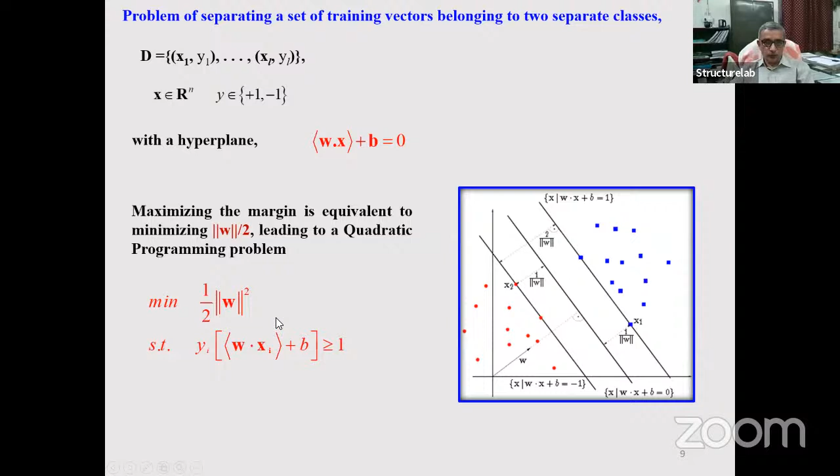Maximizing this margin means minimizing a certain quantity, subjected to a condition that takes care of the classification of the data. So this is the basic problem: solving a quadratic programming problem.

Oh, I'm going to the back side.

Now, in support vector machine, we only decide whether the data is in one class or the other, but the function does not give you a numerical value. In many applications, however, we are interested in knowing the numerical value of the function outcome.

So this is regression. Support vector machine can be extended to regression for a set of training data, meaning instead of getting a +1 or -1 outcome, you can get an outcome anywhere between 0 and infinity, or -infinity to +infinity. That is support vector regression, and the concept of support vector machine can be easily extended to support vector regression.

The problem is that you have to look for a set of functions that map the regression, where A is a set of parameters and W is an unknown parameter that we need to determine. The regression function must be found such that it minimizes the risk, achieving the lowest expected risk, while the function should be as flat as possible, meaning the margin should be as large as possible, while the expected risk remains lowest. These two conditions are typically satisfied by two mathematical concepts.

This is a well-known concept, the same basic concept we use in our empirical risk minimization based meta-modeling approach. To minimize the risk, you minimize this functional, and to make it as flat as possible, you minimize the Euclidean norm. These two conditions are simultaneously embedded in the typical support vector regression algorithm.

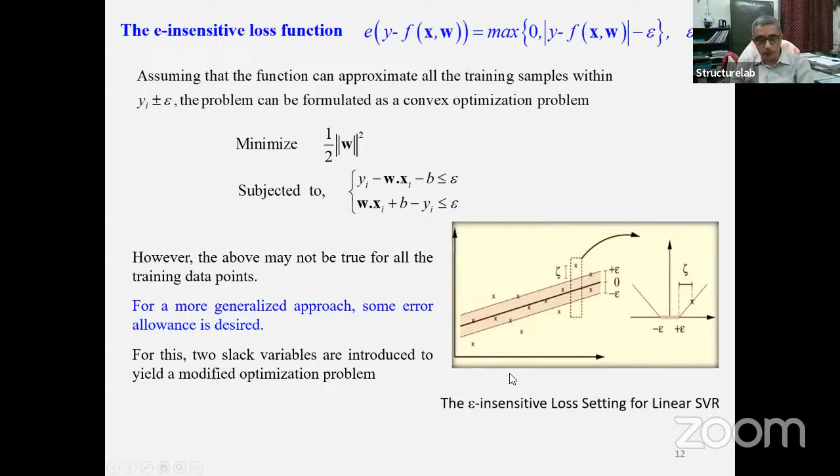So to relax this hard constraint, something is introduced in the SVR - we introduce a slack variable, so that if some point is away from the epsilon tube, it can still be considered within the data by introducing a slack variable. So even if the data is outside, it is accommodated in the formulation by introducing slack variables, and that leads to

an optimization problem like this. We put a penalty term for this slack variable, and finally this is your optimization problem. This penalty term - you know the C is the regularization constant and epsilon is the tolerance. So these are two unknown constants you have to calibrate or tune for successful application of SVR. There will be another parameter, of course.

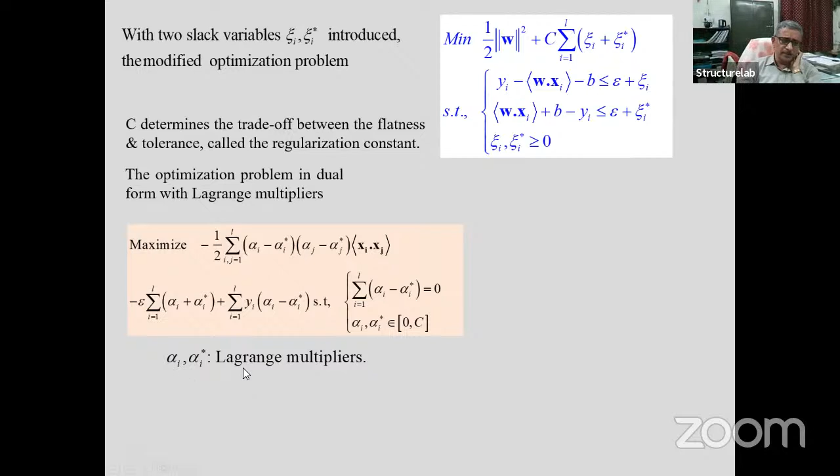Later on we'll see them. So finally, the optimization problem can be formulated in dual form with Lagrangian multipliers and applying the KKT condition. You will get the solution, that means the Lagrange multipliers, which are basically the support vectors, and your functional approximation looks like this. F(x) is like this - this is the dot product, B is the bias, and alpha and alpha star are your support vectors. So this is what is linear support vector regression.

Now you will find in many problems this linear boundary may not be sufficient to approximate your function, and you have to look for a high dimensional approximation. So let me explain the concept of nonlinear support vector regression.

Now look at this data set. You see this data, you cannot divide this data with a linear classifier. But if we make a transformation of this data, instead of x1, x2, a 2 coordinate system, you transfer it to a higher coordinate system, say higher space.

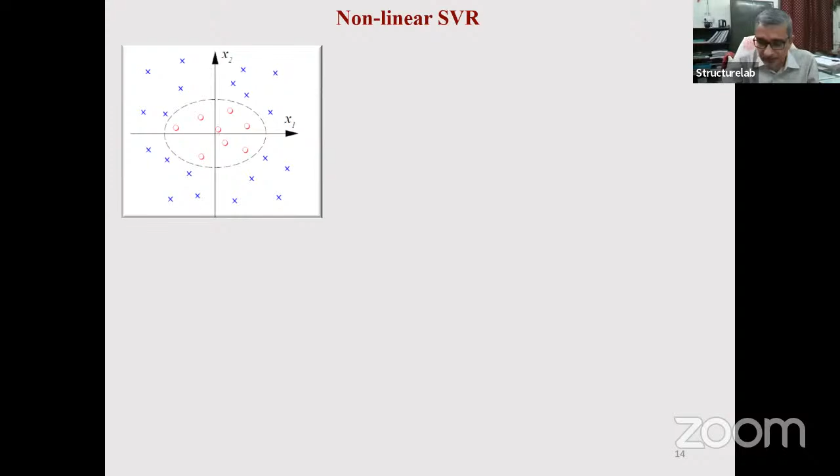That means if you make this transformation Z1, Z2, and Z3, then if you make another plot, your data will look like this in the high dimensional space. Now you can see when you transfer this data to this high dimensional space, immediately you can see that there is a hyperplane possible to classify your data into the two classes. So that is the basic concept of nonlinear support vector.

So here the key idea is you transfer your input vector x into a high dimensional space Z through a suitable transformation Z equal to phi(x), so that the data which are not linearly separable in the original space could be separable in your transferred space. That's the basic concept. And later on you will see you really don't need to know exactly the form of phi - some trick could be applied to avoid choosing a suitable functional form of phi.

And if you can remember from our previous slide, this is the regression equation in linear space. Now what we need to do is xi and x has to be replaced by phi(xi) and phi(x). That is the concept. So when you solve the problem in a high dimensional space, x is replaced by phi(x), and that means you have to do a dot product. Explicit computation of the dot product in high dimensional space will be time consuming, and it will really be a tough job in terms of computational involvement.

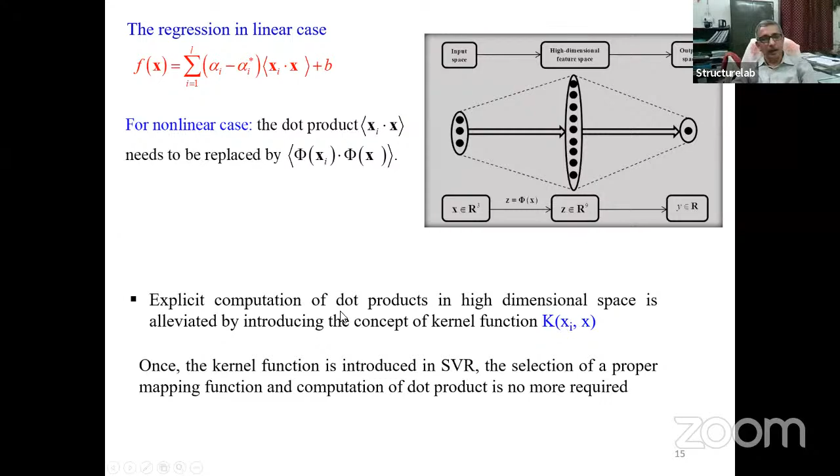So this is alleviated smartly by introducing the concept of kernel function. Kernel function concept is used in various fields of mathematics, and here we can use the concept of kernel function to replace the dot product. Once you select a kernel function, SVR computation will be simply calculation of the kernel function. And there are various standard kernel functions available in the literature.

Out of this in structural application, this Gaussian radial basis function is most popular. This is the form of the kernel function where sigma is another parameter. I have told that there is one parameter C and epsilon, now you have to introduce another third parameter sigma, the kernel parameter, and these three parameters you have to tune accordingly.

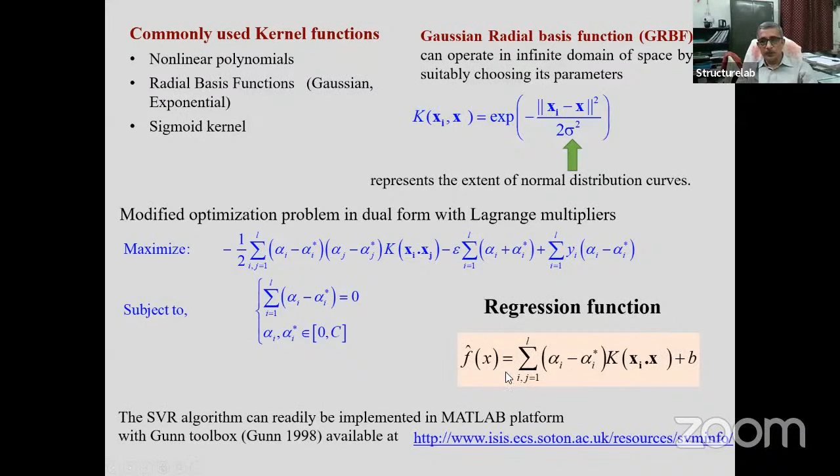Once you introduce the kernel parameter, the problem is almost like linear regression, only phi xi phi x is replaced by K(xi, x). Then you solve the optimization problem, get your support vectors, and that leads to the approximation function. Procedure is identical to linear regression, only in that case it was xi.x, now it is K(xi, x). So you have to properly choose a Gaussian radial basis function.

Otherwise, the procedure remains almost similar to linear regression, with one additional parameter C, sigma. If you look at its implementation algorithm, these are nowadays readily available in the MATLAB platform, Gunn toolbox. You can readily use it for linear as well as nonlinear regression fitting with any kind of basis function. There are a number of basis functions available with the toolbox.

As I told you, you have to go for hyperparameter tuning, and for that we have used leave-one-out cross validation approach. We calculate the generalized root mean square error by leave-one-out cross validation without any further increment of the sample size, and we minimize this GRMS value. For that, we have performed a grid search over C and epsilon to minimize the sigma value, the Gaussian parameter, and make a proper selection of C, epsilon, and sigma.

This work we have published, and you can find the details in the Probabilistic Engineering Mechanics journal. This is the algorithm of this parameter tuning: one grid search over epsilon and another grid search over C to take the final decision about C, epsilon, and sigma.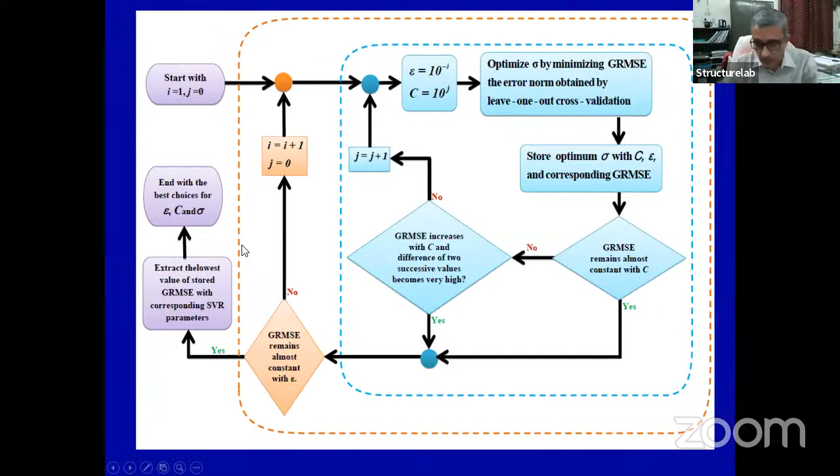Now, our proposed two-stage adaptive model is like this. The first stage is, as I told, an initial design of experiment is built by a space filling design over the entire physical domain of the random variables. You can use the uniform UD table.

Then the optimum choice for the initial SVR parameters C, epsilon, sigma is obtained by the leave-one-out cross validation approach, as mentioned in the previous slide. Once you have constructed your initial SVR model, you can get an approximate failure bound. It may not be a correct bound, but you will get some idea about the failure bound: red at the failure points, green at the safe points, giving a rough idea about the failure bound.

So we start from here. We go for a second stage, meaning you prepare a reduced space from where you pick up data to add to the existing design of experiment. First, you select nf/2 number of MCS points from the arranged list, in ascending order of magnitude, of the approximated limit state function from the unsafe side.

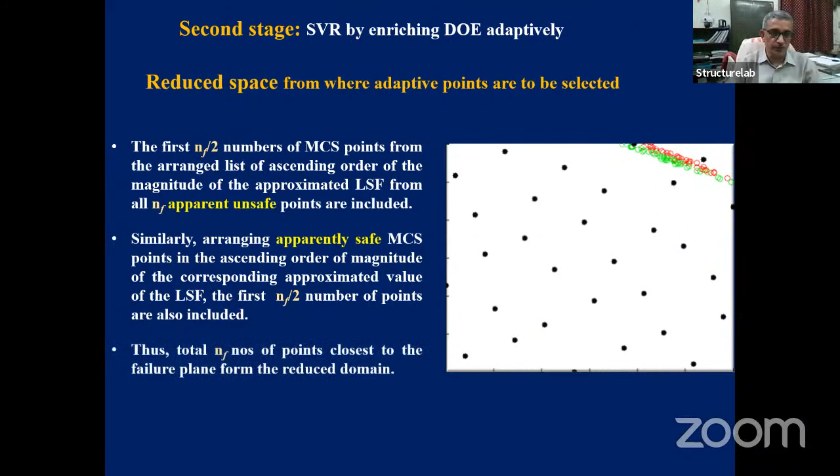From all the red data points, you sequence them from lowest to gradually increasing, and take the first nf/2 number of data points. Similarly, you keep another nf/2 number of data points from the green side. So nf/2 plus nf/2, total nf number of data points, these are your reduced space, meaning the most vulnerable data points. Now these data points we will try to add to our existing design of experiment. That is the basic idea.

Now, for each point of the reduced space, which point to take first? For that, we have calculated the Euclidean scaled distance. The black points are the existing data points, and these are the new nf number of candidate samples. We calculate the Euclidean distance, and the point of reduced space corresponding to the maximum value of this minimum distance is selected, and this will avoid clustering. So you pick up the first point, then repeat the procedure to pick up the second point.

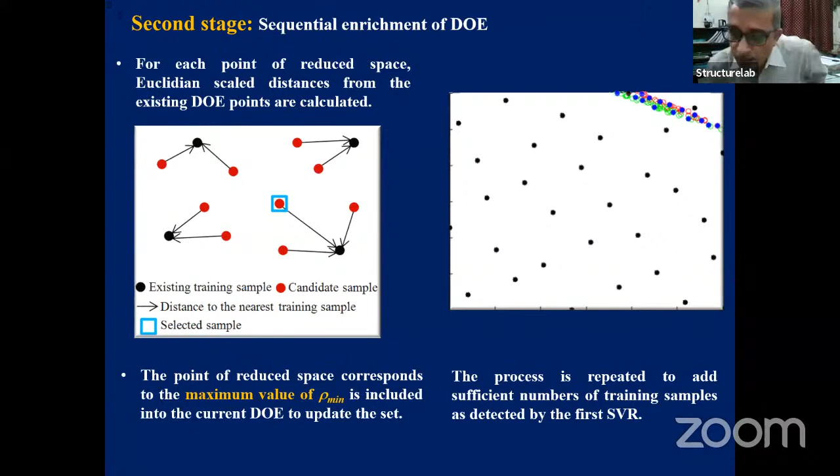Take a sufficient number of data points to add to the existing red and green samples. The blues are the additional data points added from the sample space. Approximately half of the size of the initial DOE points are usually added to build the second SVR. There is no fixed guideline; we have intuitively assumed that if we started with 30 initial samples, we make 15 additional blue samples, according to those two criteria.

Now we construct a second SVR model.

Now with this updated, that means we have the initial design of experiment. We have added half of that from the adaptive sampling, from the reduced space. We get an initial number of N0 plus N0 by 2. Now with this additional data sample, you reconstruct the SVR model.

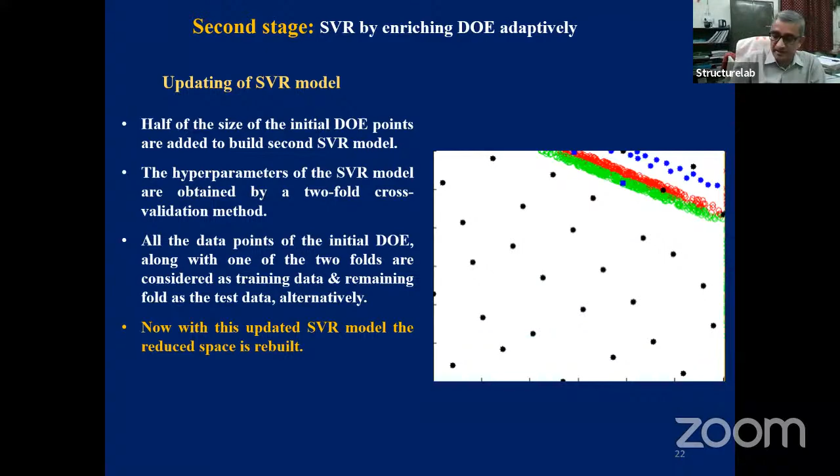Now with the updated SVR model, again you rebuild the reduced space, exactly the similar procedure the way we did for the initial SVR model. You rebuild the SVR model. Now based on the maximin criterion, two more data points from the new reduced space are chosen to update the SVR model. Once after formation of the second SVR model, we have updated the reduced space.

Now from this updated reduced point, each time you take 2 data points, add to the existing design of experiment, construct the SVR, update the SVR, and this is an iterative procedure. So you add 2, update the SVR, again update the reduced space, again add 2 points, and continue this until convergence.

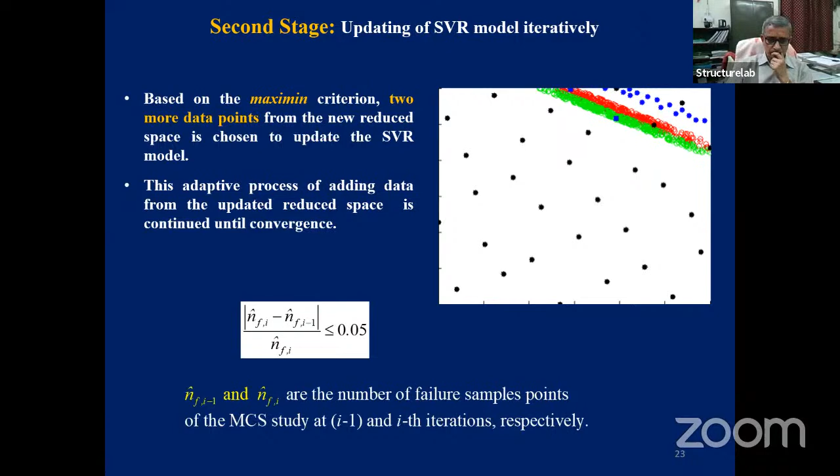We have taken 5% between 2 subsequent iterations as the stopping criteria. So this is the algorithm, and we have explained it through a few examples.

The first one is a 29-dimensional standard test problem. This is the function which needs to be approximated, though you really don't need a meta model, but for explanation purposes we have taken it. So this is the limit state equation, and these are the standard data for all x. We have estimated the probability of failure with the initial SVR, that means the usual SVR, and by the proposed approach, and tried to compare it with the Monte Carlo simulation result.

So you see this red one is the approximation of the reliability result by the initial SVR, and as we update it after a few iterations, we got this green and blue updated results, and the black ones are of course the exact results, or the direct Monte Carlo simulation results, right? So we can easily realize the improvement.

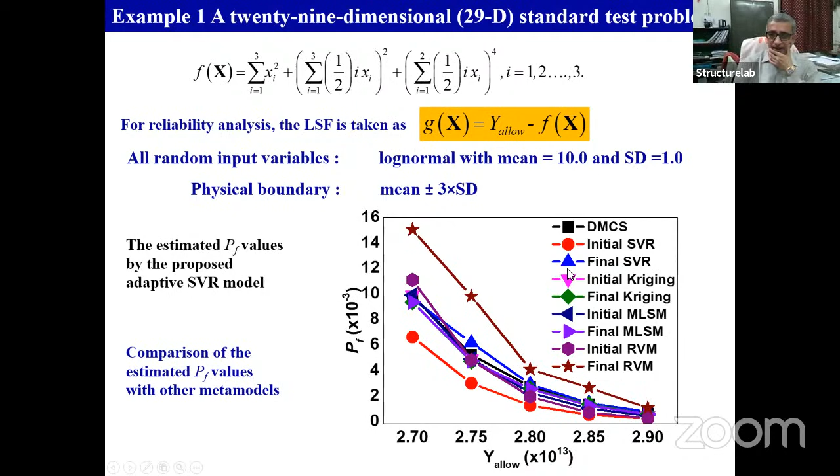Out of this, RVM is not working very well, but you can see the SVR is consistent, and in most of the cases it is better compared to the other meta modeling approaches.

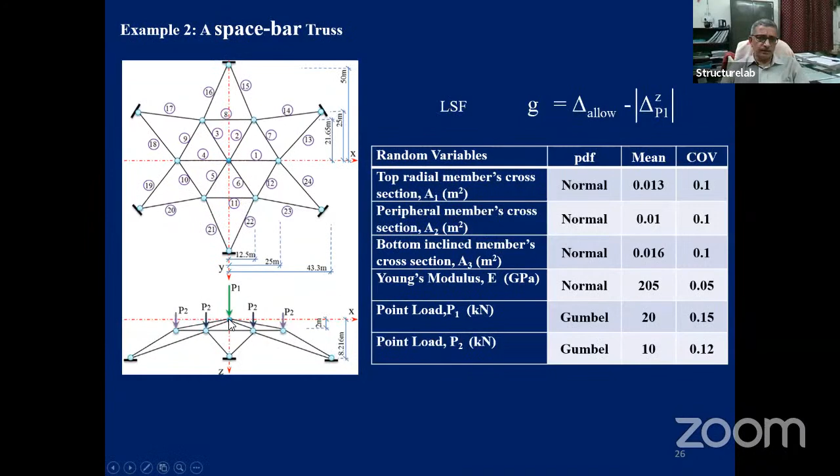Then we have taken another, a little bit more realistic problem. You need to evaluate the performance function for finite element analysis. These are the data, it is a space-bar truss. So the limit state function is the central deflection exceeding certain values. These are the data, and this is again a similar kind of comparison.

So it shows that it's working. Though I have not shown here, we have tried the reliability analysis with this adaptive sample using various initial DOEs to understand the robustness of the approach, and we have seen that even if you start with a different set of initial data, it converges to an almost similar final estimate.

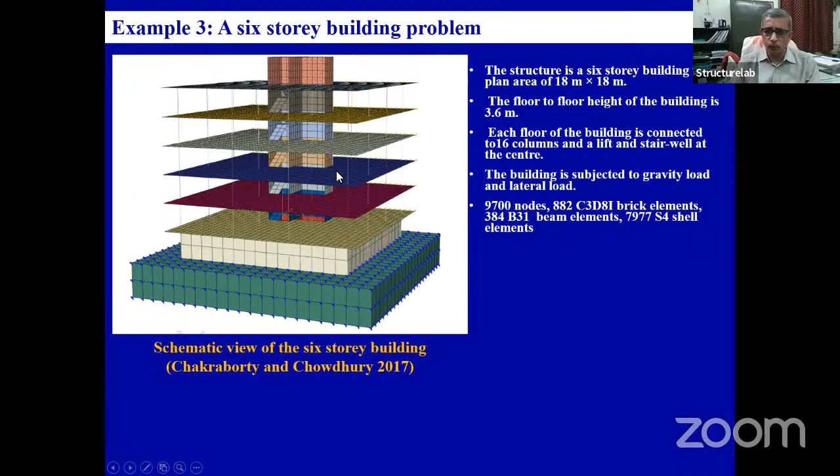Of course, we have not modeled the details of the finite element model ourselves. Nowadays, a lot of things are available in GitHub, so you can find this model. It is the Abaqus model, and all these model details you can directly run there. You will get this model in GitHub. We have taken the model from there.

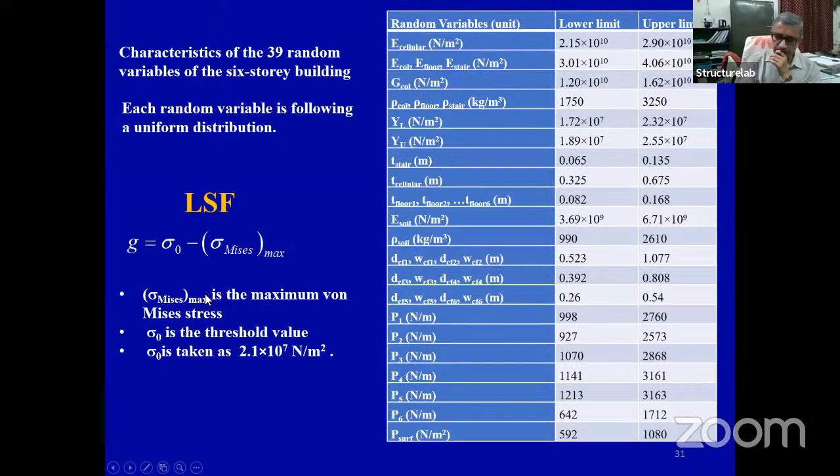These are the 39 random variables of the building, and the limit state function is the maximum von Mises stress developed in the model, and sigma 0 is the threshold value. So if it exceeds this value, it is considered failure. Accordingly, we have approximated the limit state equation, and this is the result.

So with this, I believe I can conclude my work. The effectiveness of a two-stage scheme to obtain training data to construct an SVR-based meta model is presented here, and the scheme provides a much improved estimate of reliability compared to that obtained by the SVR model constructed with initial design of experiment data, and compared to a single shot design with the same number of data, showing improved performance of the proposed approach.

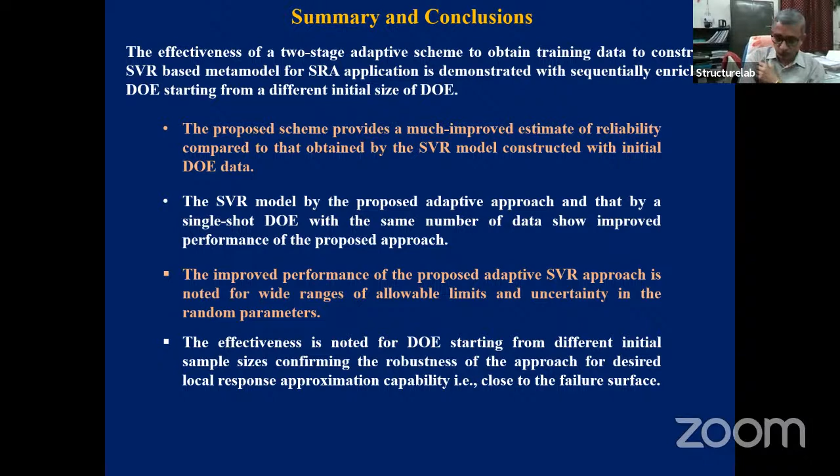But there is a bottleneck of this approach. If the initial SVR detects a very small number of failure points, the algorithm cannot be applied straightforward. That means you are updating the model from the reduced space. Now in the reduced space, if NF number is very small—1 or 2 only, or 3—then you cannot iterate. And this can occur when your probability is very small, then NF will obviously be very small. Then this is the bottleneck of the approach.

Of course, we have further extended this work to avoid this bottleneck. Maybe that will be presented on another occasion.

So I want to specially thank my PhD student, Mr. Atin Rai. Actually, it is his work, and he is going to submit maybe by next week. The work I have presented, you can get more details of—we have already published this work, it is his PhD work. And the bottleneck work also, we have very recently published, where we have addressed this scarcity of sample issue, so that you can extend the approach to a very small probability of failure estimate.